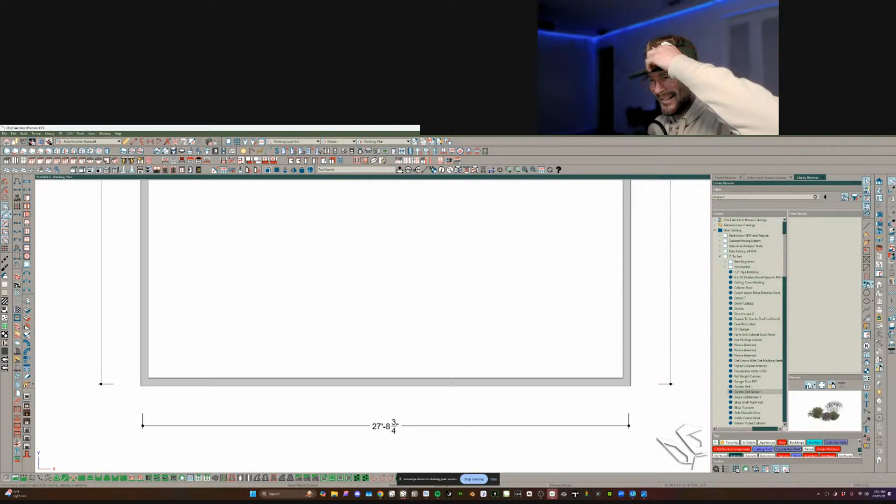Hey, you've been coming into these shows. I love having you in here. We've had some good discussions in the past. Is it an AI rabbit? Yes, I trained myself, or I trained an AI on myself. It's such a funny tool. Yeah.

AI rabbit, that's the cover art you're talking about, I think. That's this guy. Actually, what did I do? I doctored this thing up for the YouTube cover. That's just ridiculous, huh? Can I make that face? Let's see, it looks very concerned. It got my nose if I get the lighting right. Pretty funny. Yeah, I agree, it's pretty good.

Look what I was just working on too. I was setting up for a new video coming up where if you just have existing pictures, the only thing someone's doing is some kind of color change to mask out a room and apply it in a way that actually looks realistic. That's pretty cool. I feel like I could almost build an app out of this if I just gave 20 pictures to ChatGPT and said, hey, build me a little JavaScript app where someone could just change the color coding somehow. It'd be slick.

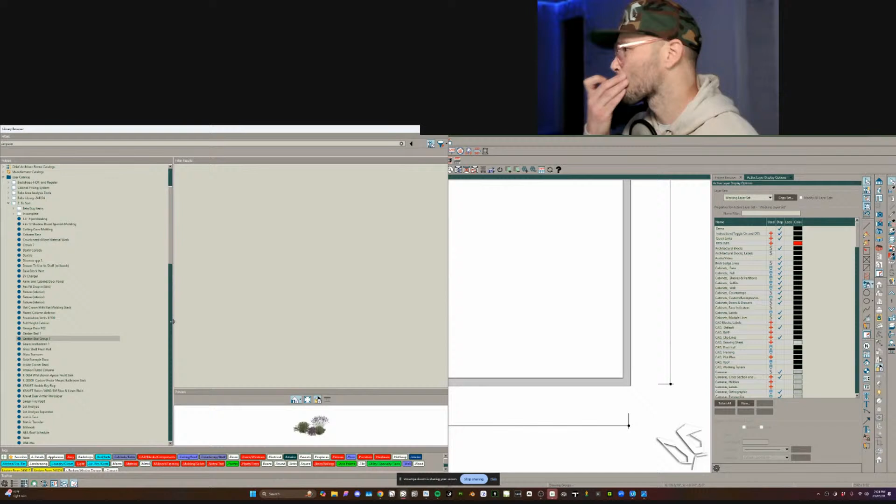And yeah, so, that being said, wish I could zoom in the screen a little bit more, get the text up. I probably could actually change the whole sizing. But this is a pretty good preview window. Here, I'll just make it bigger. Bam, big old preview window.

Yeah, Sherwin-Williams does that on their site. Right, but can you do it with your own picture? Can you, because I don't know that you can. That'd be cool if they figure that out.

Yeah, the text is too small. Let me see if I can do anything about it. I forget how to actually show my desktop, I haven't had to do that in a while. How do we show one's desktop? I know there was a button for it at some point. Show desktop? No.

Shrink this, let's just see if we can't change the scaling here. 150? Needs to still be tolerable for me though, I can't just be taking over the screen. Yeah, that's all right. Can definitely see that better. But I don't think I can shrink this. Oh, there we go.

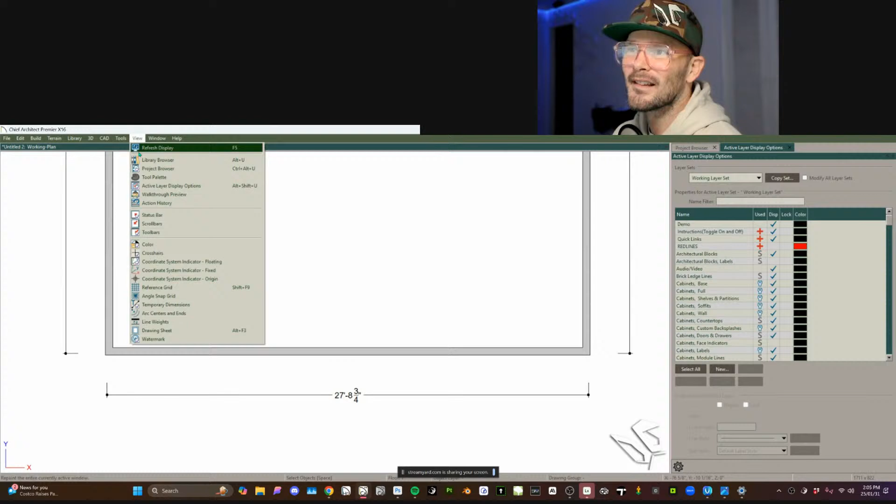Cool. There, in fact, what happens if I close this down and I'm going to switch to ultralight? I have an ultralight toolbar where it's just nothing. And now I don't know how to turn on my library browser without the button. Where's the library browser live? I thought it'd just be here. Oh, there it is, View. Cool, there we go.

Uh-oh, I stopped sharing my screen. All right, there we go. That's a bizarre looking library browser now.

Let's see, I believe the exterior, yes, not sure of interior. What's this in regards to? What's this responding to? Dang it, I missed something.

And Merlin, and you want a 98 inch for it? I have a 12-foot 4K projector. I've actually never- that's not true, I have hooked up my computer to it before. And right now it's on sale for like $1,200, which is crazy because it was $2,600.

Oh, gotcha, that's what you responded to. The Sherwin-Williams app will do exterior, not sure about interior. Interesting, I imagine exterior would be a lot easier to do. I don't know how we would pick up white because if you would look at the source image here, the source image is this. I have no idea how it would figure that out. It wouldn't, is the answer. There's no way it would.

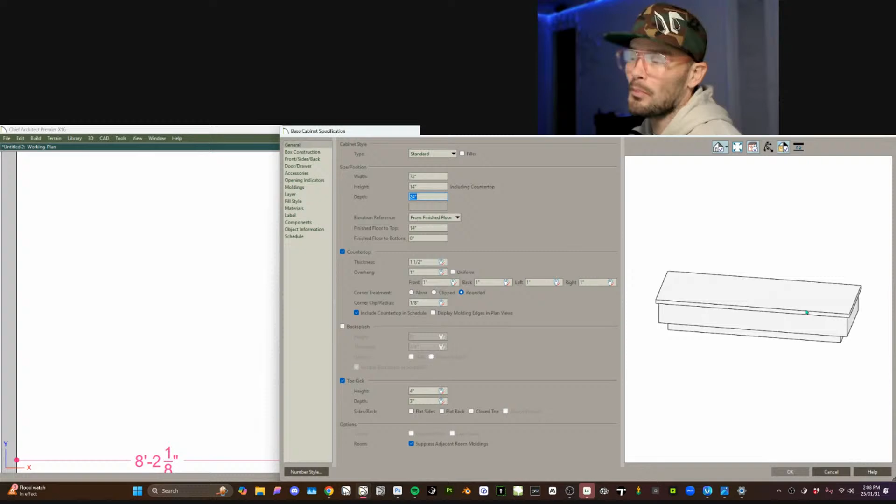Okay, so we got a base cabinet, and let's just say that it's going to be a 6-foot wide. This is going to be an outdoor fireplace, right? So we'll delete this item, delete that item, delete that item, get to a blank, and let's go. Let's go inset toe on all sides, right? And then the height maybe is like 18 inches, and it's probably less than that. It's like 14. And then so that could be like a stone top, or it could be a one-piece deal. Let's make it a one-piece deal where there's no overhang.

Yeah, maybe make it a little bit thicker. There we go. Yeah, I think that's what I'm looking for here. And so this fire pit sink just drops in like that, and you take it and center it up, right? Oh, except for it's got no emitter in the fire class. Dang it. So we got to fix that real quick. This is part of it too. I got to fix things as it goes, make sure that it's absolutely the way I want it to.

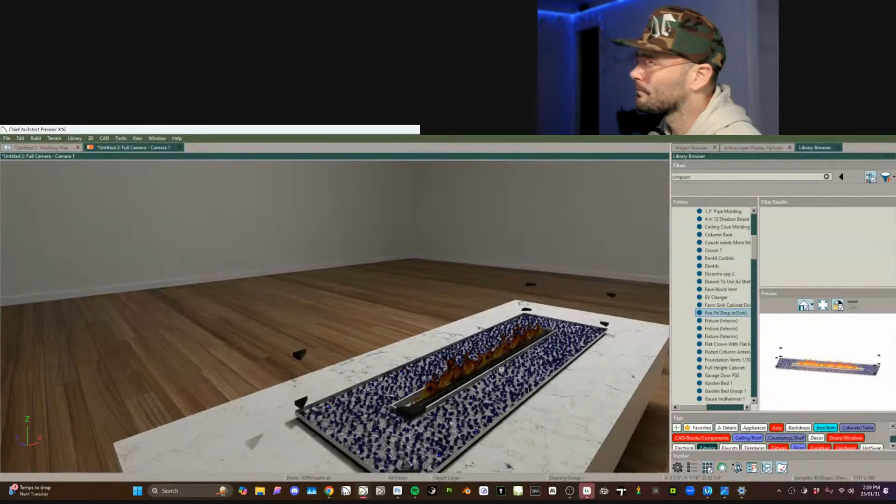So this fire should be, let's edit this. And yeah, it's not emissive. What the heck? Should be like that. Bam, give me fire. Give me fuel, give me fire. Okay, now let's try it. Surprised they don't do the hover over replace icon in this. Cool, look at that. And just like that. Yeah, I like it. Doesn't look like much outside right now. Maybe if we turned off the sun.

It's funny when you work with no toolbars trying to figure out where things are in the menus. There we go, because now I want rendering technique options. Let's see if I could go Alt 3 and Q. Interesting. Okay, and then, oops, we're hovering over the top of physically based. Wait, Q. Interesting. Physically based is not underlined. Oh, but I wanted technique options. Alt 3 Q. Technique options. Oh, try to remember that next time. And then pump this up to like 150. That's too high.

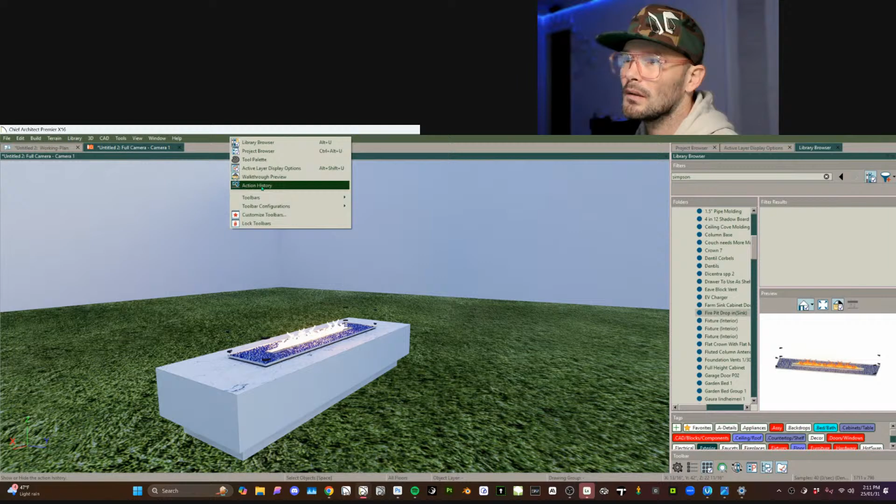All right, getting stuck in the weeds. Typical me. But yeah, this is cool because then you get to spray this, whatever you want. Could be multiple colors, yada yada. So I need to save that cabinet too. All right, I need my toolbar configuration. I'm lost without it. I really am. Look, full stone. Very cool. Why not just save the whole thing? I like that one. Fire pit. Rab's pits.

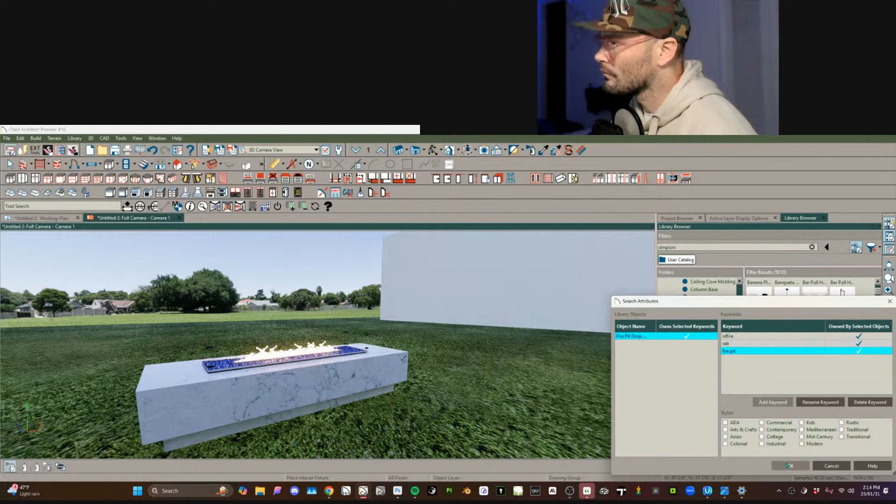Okay, what's next? Let's get to some good ones. I just want to skip some of the ones and get to the good ones. I know I've made something good in here. There's that fire pit drop in. I almost just kind of get rid of it now, right? We don't need the sink insert. I guess it makes sense. Sink insert. Yeah. I think I have components. Yeah, fireplace components exterior. Perfect. Fireplace components. Bam. Cool. Bunch of fixtures being used for what purpose? We don't know. Probably examples from trainings.

By the way, if you guys are in here, let me know if you have any questions. I can do a little offshoot, show some cool stuff. Ooh, I did make a foundation vent schedule. I don't know if I want to give that away. Does it do fire? Yeah, Twinmotion does fire. Twinmotion does animated fire.

Please convert the pagoda into a symbol included in freebies. Yeah, thanks. That is a pretty heavy scene, I'm not gonna lie. But what a fun scene. Yeah, it's a cool one. I'm not even gonna open it up. It's gonna take a while just to open. Rebuilding the roofs at the corners just takes forever for Chief. It does not like it at all. So if you're curious what the heck I'm talking about, look, there's a bunch of AI me's. Yeah, this guy. Yeah, she doesn't open up too fast. She gets real mad. My computer gets real mad. Bermuda pagoda.

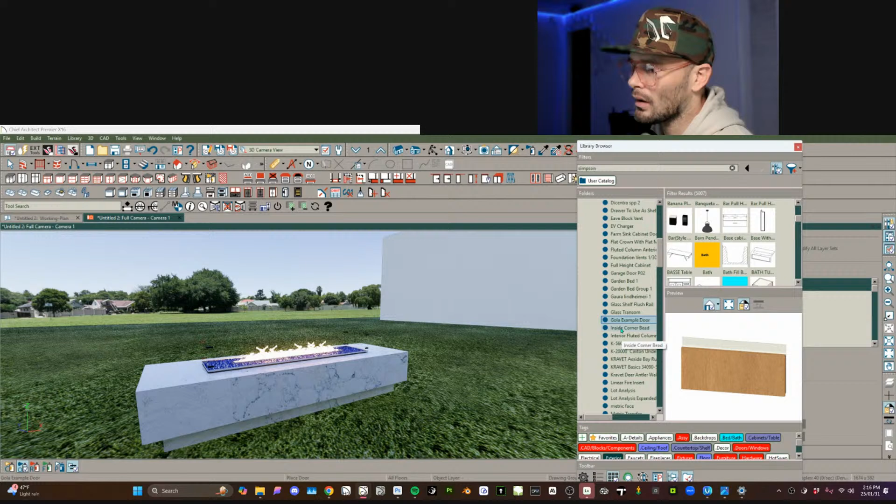Oh, the Gola door. I did build this out, but I didn't know what to call it. So it's Gola. So what did I call it? I called it, shoot, it's in specialty cabinets. Specialty. No, I have a specialty cabinets. Hold on. What do we have? Special. Huh. I thought I put it in there. Now I don't know what to call it. Well, where the heck did I put it? Oh, I know I could find it.

It's in my updates. So update from this date. Can we find, and then search by cabinet as a type. There it is, channel. So what's it actually called? Let's see. Shown folder, channel base, in components. Why did I put it in components? Let's go special instead. If I could spell, it'd be great. Special kitchen, special propane tool, special, yeah, special. It's special.

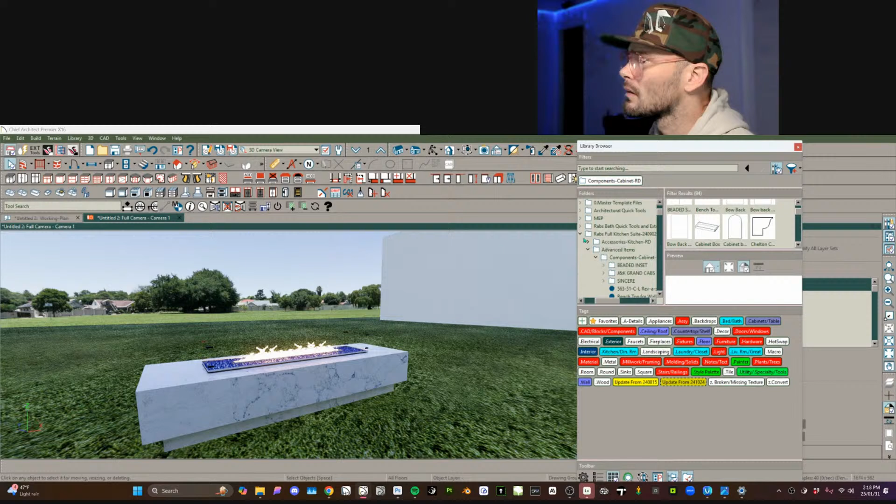Boy, it's hard to see with this font being this big now. Easier for you to see. It's terrible for me to see. This is awful. Let's see.

Gola. Gola is what it's called. All right, so you should be able to find that again. And add a search attribute, Gola. The Gola cabinet. Do you know what this is? It's difficult that you can't place a cabinet when you have no rooms. It's this guy. It's that whole channel slot system thing.

Gola. Where you would butt a bunch of these together and then do a little filler on the end cap to stop this whole thing. Yeah, because I do have a tool for that. Where is it? It's like bam, bam, and like this, and then like that, and then say, let's go. Should fix this so this always does this, no countertop. There we go. And that would be like the end cap, whatever that is, right? And maybe you'd fatten that up. Who knows? Yeah, that's pretty slick.

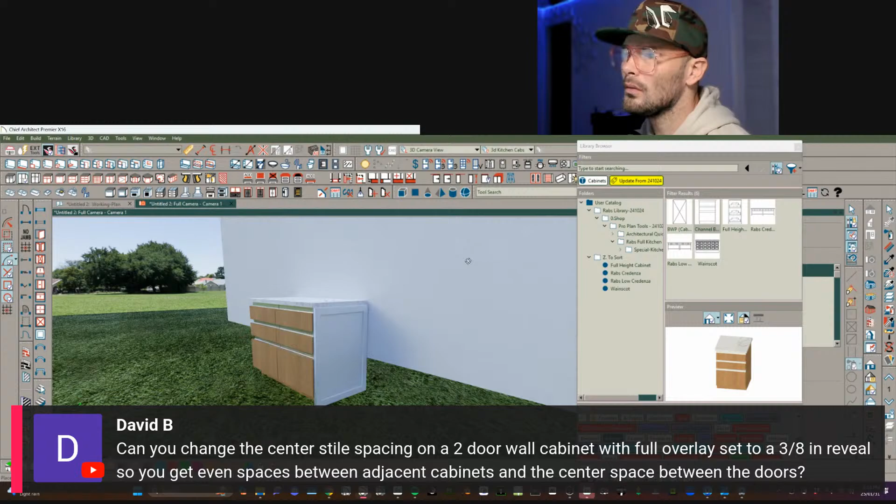Let me read that. I got to read this twice, David. Can you change the center stile spacing on a 2-door wall cabinet with full overlay set to 3/8 in reveal so you get even spaces between adjacent cabinets and the center space between the doors? I think so, would be my response to that. So let's just do automatic doubles, but if you have a stile in between, you could always just split this configuration. You don't need to use double door. But in door drawer, there's a stile between double doors, right? And there's no way to specify that stile is what you're saying?

Let's go into box construction, 3/8 inch overlay. Yeah, that does it. There's your 3/8 inch overlay, but you're saying that when I butt this to another cabinet, this reveal is wrong. So you want 3/8 inch stile in between. So then left reveal, right reveal would just be half of that. So you literally could put divided by 2 here if you wanted to. And that would make it even, right?

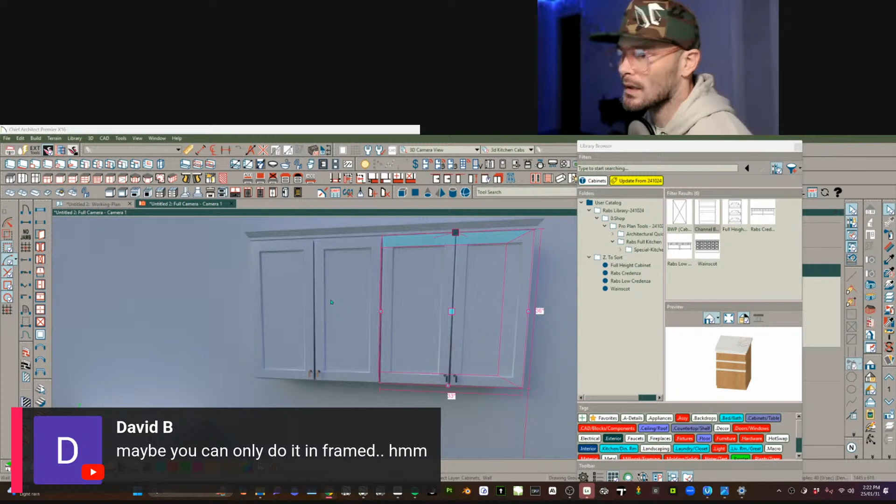Oh, and you're saying maybe you can only do it framed. You're talking about a frameless setup. Okay. We are in a frameless. So this is one way to do it: I manually adjusted left and right, and then 3/8 inch setting in between. But every time you split a door, it's going to be 3/8 no matter what, so you'd have to manually adjust that if you didn't want it to be 3/8. So this has got an 1/8 inch reveal on either side, and 3/8 in the middle. Not 1/8 inch, 3/16, half of 3/8. Don't make me do math, man.

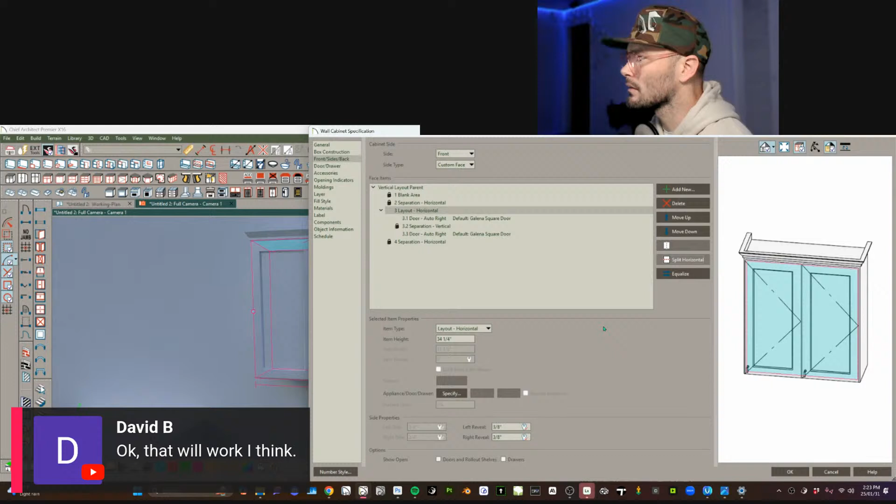Yeah, that'll work. The other way of doing this, let's set this back to default. You don't want it to be 3/8, you want it to be 3/16. No, let's just make it 3/8, whatever. But we're going to show this is even all the way around by taking this door right, splitting it vertically, and making this a door left. Maybe it's not reporting the same way, but this is doing what you'd want. Then we're just changing the separation in the item reveal in the center, where this is like 3/4. Now when we butt this, it should have the same look. Right, that's the same. Yeah, so that way works too.

Ooh, got something in my eyes.

Yeah, and then you would just set this to default, and it's not going to affect anything else. Because if you set this to default and then this was a single door, we're getting rid of the separation anyways. That should all still have the same gaps. Yeah.

When you're creating things like the fire pit, how do you decide what to start with, as you made the fire pit out of a sink and you made other things out of a cabinet door? Well, the fire pit, mainly because we needed to have an insert that's going on the top of a cabinet. So it's got to be an appliance or it's got to be a sink. And then the really nice part about the sink aspect of that is that we have the ability to decide how the symbol is going to cut the cabinet's countertop. So that's cool too.

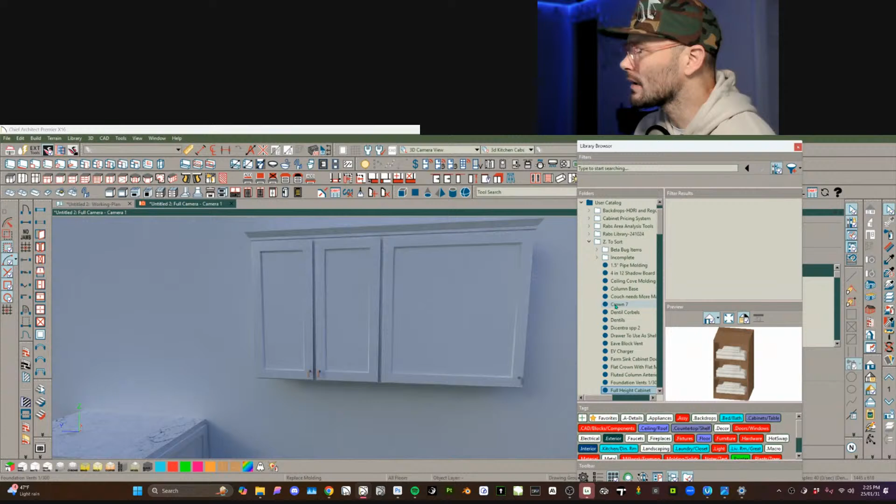All right, so what do I got here? Let's get back into my sort. Let's see what other goodies. I want the goodies. Foundation vent. I need to fix that cabinet. I'd like to do some more garage door building stuff. I want to make a garage door builder for clipped corners out of a cabinet. And that's challenging. That's challenging. Yeah.

Glass transom. What do you think I was doing with this? What is this? Oh, this is for showers. And it's set to be arched. But yeah, this is just to go into a shower builder. That's cool. That's a little add into my bathroom tools. It's just a window with no sash and no anything. That one's simple. There's that Gola example door.

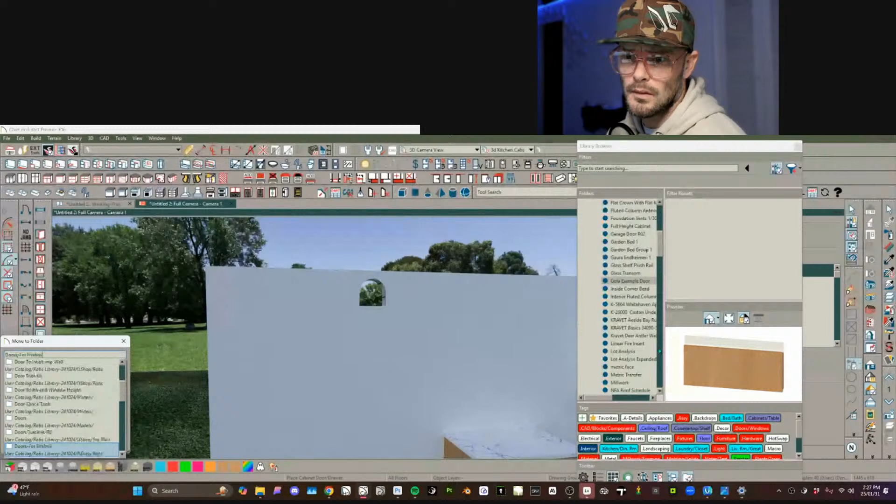So door's redundant. I don't know why I did that. Components, cabinets, tables, doors. Cool. You don't want it to show up with cabinets, but yeah, all right, fine. Door? How about door? Door. Doors, cabinets. Bam. See ya.

We had a good conversation, Dermot and I. Dermot's the one that's his code. Dermot's the lead developer at Chief, and that's his baby, the cabinet tool. And he's very proud of it. He is. And yeah, he put it in a really great way that the cabinet tool is a building block. You know, yes, it happens to do cabinets, but it's really a building block, and it's a great one.

Sonic, switch you over from Xfinity. Do you like it better? I have Xfinity, and I hate it. It's the worst. I pay so much for it, and it's constantly lagging. I just hate it. Hey, Dennis or Denise? I don't know how to pronounce that. Interesting with just the one N. Hope I'm not just being ignorant.

What do we got? Oh, we got a couple little cool materials that I've picked up or made. That's cool. There's a linear fireplace insert. How's that look? Fire, yeah. Have a theme. I guess I've been working on fire stuff. I should have a classification of inserts in the wall in here. That'd be a good one. So fireplace. Oh, this was already updated. Interesting. It's got 2 update tags. Wall and fireplace. It just never got sorted.

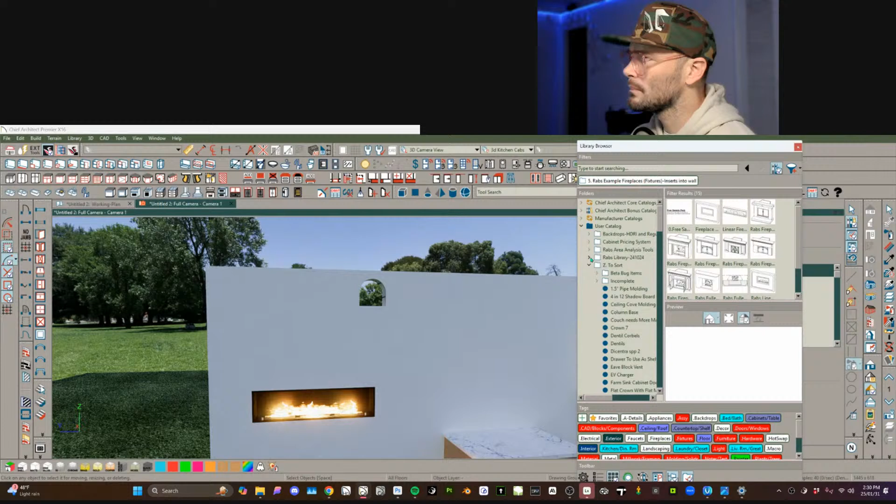Never understood fireplaces myself. I'm not lighting any part of my wall on fire. It's the 21st century. Okay. All right. Interesting take. I have a fireplace in my home. I love it. That's funny.

So this is my new favorite thing, garden bed group. You know why? So cool. Boy, I have been able to just build out landscape so fast now. It's just nuts. So let's just take a polyline distribution region and look at this. Isn't this just wild? Like, yeah, you got to edit just a little bit, bring it in a little bit, whatever.

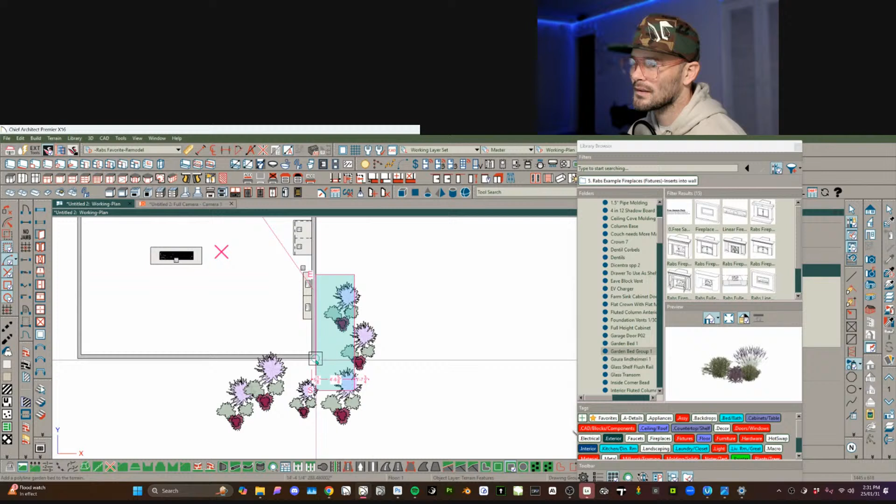But then you got a terrain polyline garden bed, right? Sure, we'll turn on terrain features and kick this in here and do a little fillets, right? Whatever you want. Maybe you want it more precise than that. And then, yeah, kind of kick this into place and have it produce its thing.

And so this is just an architectural block. And you could set the spacing of the block. Let's go 35. It's going to maybe jump that in a little bit more. Alternate grid, maybe? Alternate grid, kick it back to 45. But just super fast to build out landscaping that way. Just making architectural blocks with a bunch of landscaping. Bam! Isn't that cool?

I turn up the heat on this shot. Bam, bam, bam, bam, bam, bam.

Yeah, I've been pumping out landscapes. It's awesome. Man, does it make a lot of sense. In fact, I'm not using Twinmotion. Like I just did a project. Where is that project? Oh, it's in my

Nancy, you didn't actually see a contract from me. Wait a minute. No, this is Vicky.

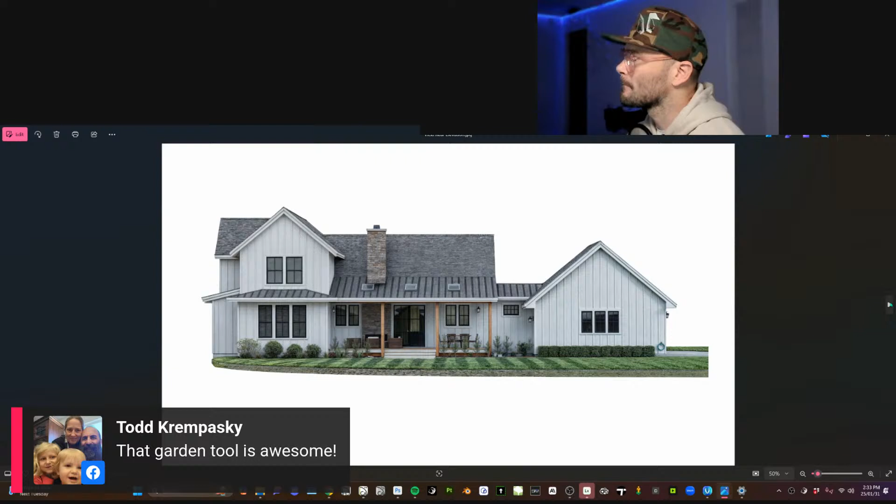Cool design they've got. I hope they don't mind me sharing. But yeah, I pumped this landscape out so fast. Look at that. Isn't that cool as an elevation? I want to do a plan set where the elevations look like this. I don't see that there's any reason why not. I don't think I would get tagged for this at all if I threw some annotations on the top of it. Because yeah, what a good look.

But yeah, the new landscaping tools built all this out just super fast. Even this little tufted grass with rocks, that's all just an architectural block that's got multiple different things in it, and then that's put into the distribution region and pushed around. So yeah, I was able to build this out quick, which means I got to drop the price down for the client.

Or gouge them. All right, what do we got?

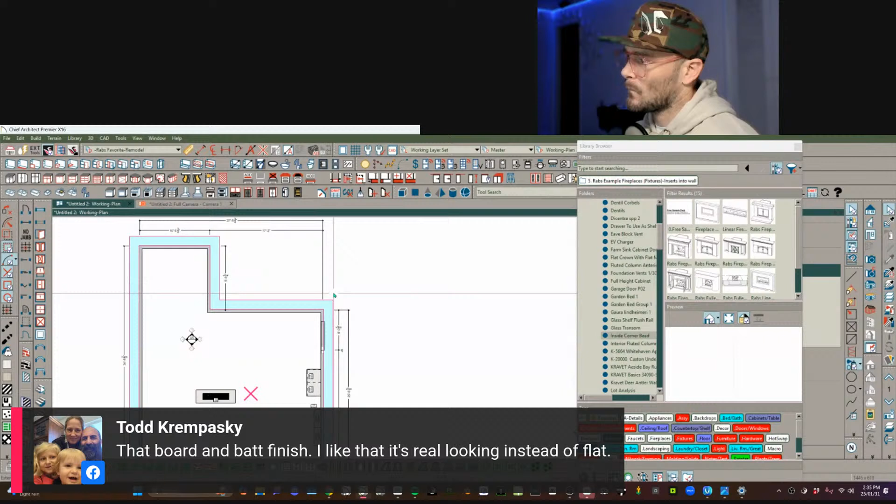If you haven't seen that, she's using a method I showed many, many videos ago where you make the shape of your building, where this is. Right. And then you take, let's see, a good way of explaining this. I think I actually have it.

Let's look up batten. I don't know why I don't follow my own rules. RD batten should have gotten me there. Oh, it didn't. Haha. I need to fix that. Batten. There it is. Backsplash. Board and batten. Backsplash. User catalog. Search attributes. RD batten. Look at this. We're updating stuff on the fly.

So that's an architectural block, right? So we get to select the exterior wall in your edit toolbar, wherever that may be. Mine's missing because we scaled everything up so high that it's not there anymore. Dang it. How about now? Okay. Make room polyline. Convert it. Oh, I've got your comment in the way too.

Make room polyline. Convert the polyline. Turn it into a distribution. Polyline distribution path. Okay. You can leave it light fixtures. That's fine. And then take your backsplash, hover over, replace. There we go. And then we're going to make maximum distance 12 inches. All right. So now I got a batten at 12-inch, relative angle, one-sided.

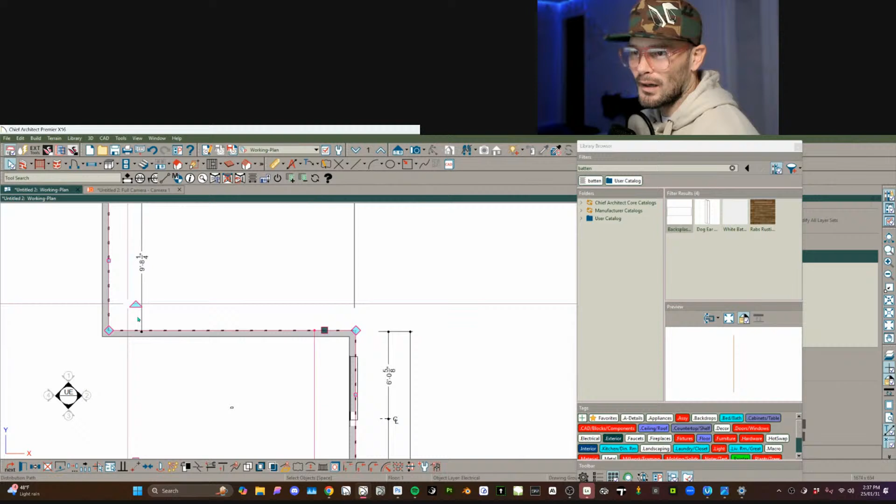Bam. There we go. Now you explode the distribution path, and you could select one of these, which is still an architectural block, and then you could explode that. Actually, before you explode it, you could marquee select all similar, explode. And now when we switch back to our camera view, these should be battens. Look at that. Isn't that cool?

And you might have had to select those all back in that plan view and lift them up, and then maybe fix a little top batten here, blah, blah, blah. So yeah, that makes life very easy. I don't know why they're wood. They didn't used to be. They used to be my batten color instead.

Are you doing it with solids? I imagine. Are you doing it with solids? Or are you doing it with backsplash? Curious. You're doing it with moldings. Yeah, but moldings don't shape around architectural features like the window and stuff.

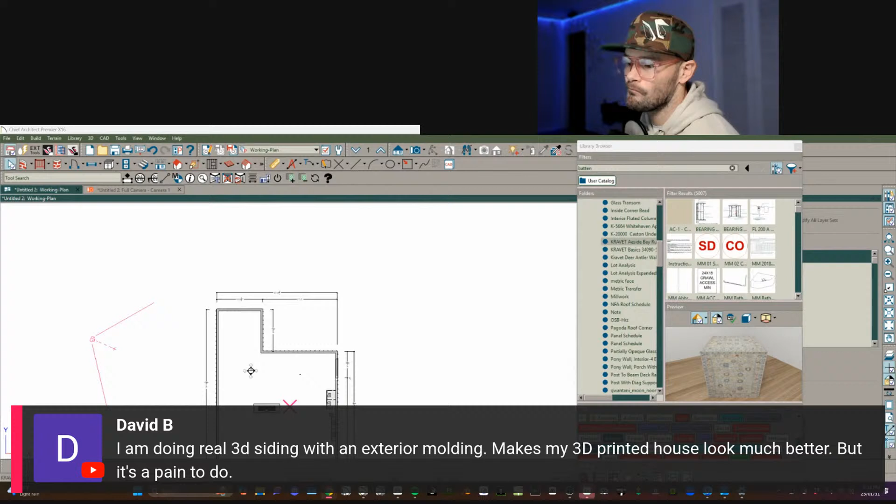Because I feel like you could do this. Like, all right, well, let's see. Let's take one of these guys, get rid of them all, and then, I am lost at this screen size. Yeah, so let's just say we got a window in here, and from the window to the wall, and we got a little backsplash, right? And we're going to say that he's what, 8 inches? And take him to the corner, and he will miter at the corner, and take him through.

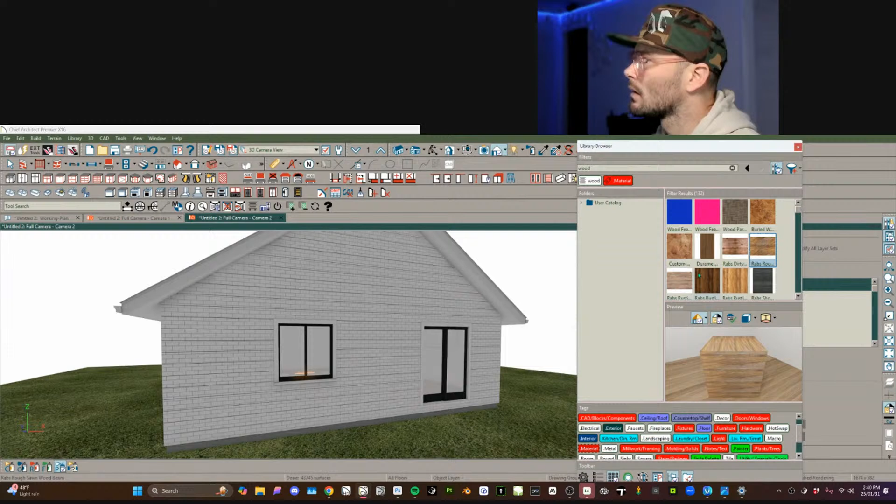And then bam, interval 8, what? 0.3. Sure. And then some wood texture. Wood material. Because it's not showing up. Wood. What wood? Or white, I guess. Plan mode, yeah, sure. Look at that. And then if you got really fancy, you could probably go in here and do a little material adjustment and throw in a little ambient occlusion map that's a little grungy-ish, dirty maybe, something like that would probably be perfect. Yeah, it's perfect.

And then you're switching to physically based. What does that look like? Cool. I don't know. You have to tell me if you ran into any problems with that. But I think we just get to come into this view, and if we have backsplashes turned on, we should be able to just do this, do this, do this. Yeah, do that and do this. Yeah, because that was the longest side.

So now do we have two sides? Yeah, there's the two sides. Cool. And look at that. They join in the middle. And they're still cutting for everything. Except for they cut around what happened up here. Oh, this is my transom window. Nice. Yeah, it looks pretty nice. What's our surface count on this model already? Yeah, it's not bad.

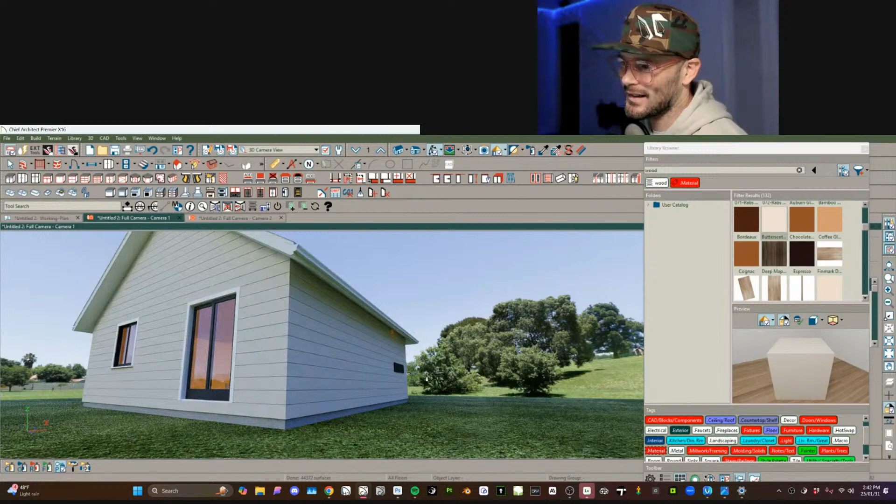Look at the corners. What's wrong with the corners? You were looking at, oh, on the other side was the texture. That's because this is a texture. But this is the actual, that's the backsplash. Zoom in on a corner. Okay. Yes. What am I looking for? You want this like overlapped? Oh, nice. Yeah, try it out.

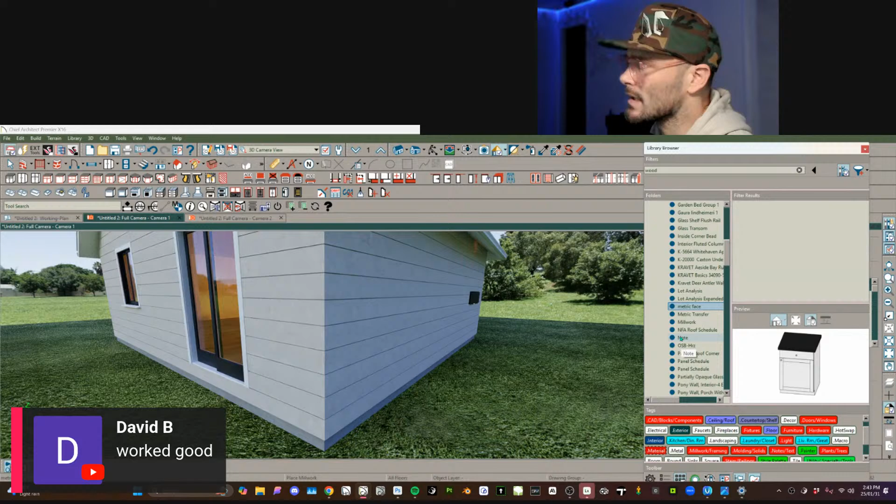What else? I know there's got to be some gold in here. Some of these materials are pretty cool. Metric face. Oh, I started building a metric template. What a pain. Metric transfer tool. Yeah. Millwork symbol. I wonder what I was using this for. Sometimes I make stuff, I don't even know what I was doing with it. Why would I need a 3-rail setup? It's for a railing, probably. Net free area roof schedule. Cool. Huh. I don't know what that's for.

This is just garbage. I noticed some glitch lately when I'm doing some templating stuff. It's automatically adding certain materials to my thing. Ah, the pagoda roof corner. This thing was such a pain. Panel schedule. Oh, electrical panel schedule. Ooh, does this work? I never know the state of things with my panel stuff that I try to make automated. Okay, let's try it out.

Let's build some walls. All right, and let's say this is a kitchen. Let's say this is a living room. And what does the panel schedule do? Nothing. Doesn't do anything. Womp womp. How about this? Oh, look at that. All right. It's automatically picking up first and second pole. That's cool. And what? No door yet. Okay, place them anyways. Living, it's automatically making living outlets. All right, what about switches though? So it doesn't do anything with switches. So what about lights? Well, let's see if it would take distributed lights.

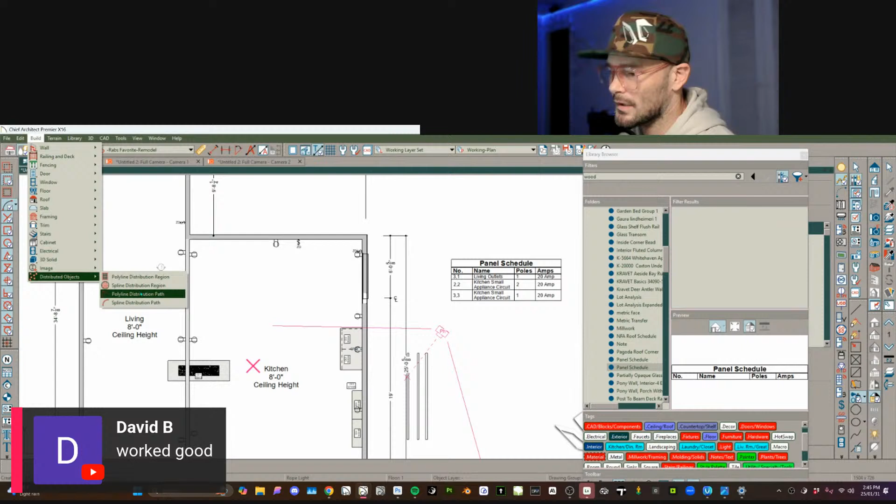My pro plan, by the way, in case you guys don't have it and want to build this for yourself, is that the default polyline distribution path is lighting for me. And when you get really used to it, like say I want a light centered on this cabinet, you're just going to draw the thickness of the cabinet. Now it's centered on the cabinet. That part's easy, right? But then you can also use it to say, hey, I want this whole run to have lighting and I don't care about the centering, etc.

And look at this. This is turning into living room lights, kitchen lights. So the only thing here, oh, I must have this built into my template. Look, it's showing that it's in 2 schedules. Or, oh no, I know what it's doing. So I have to assign a number, I think. Or maybe I can get it to see schedule numbers and only report the second schedule number. Okay, let's try that. Let's try my bot.

rabbitdesign.net. Oh, by the way, look at this, my main screen isn't loading. I don't know why, but I have a new push notification thing on my website. Why isn't this showing my graphics? There we go.

Resources... and building code lookup is not what I was looking for. Macro scripting, here we go. And let's go, all right.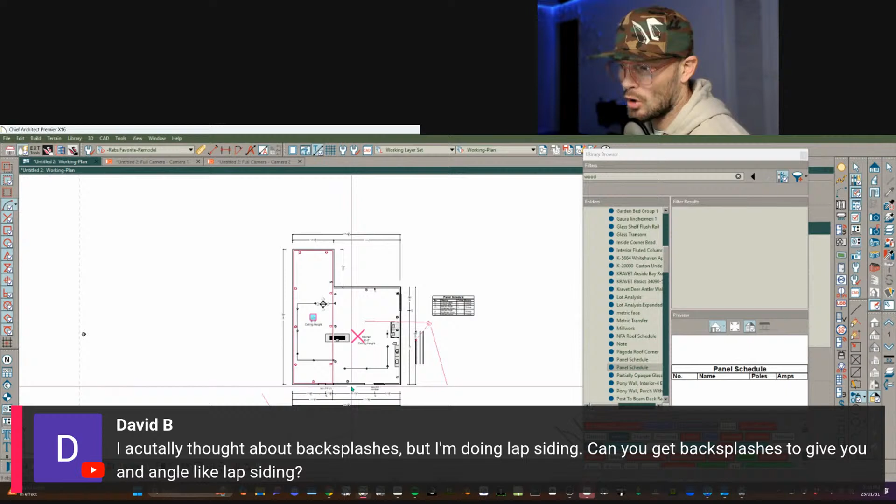Find and plan, open these bad boys up. Let's make a custom field, or there are custom fields in here already. So macro input one already has something. Oh look, I already had some value that's being reported. But really, what I want this to be is this.

And I don't think I need the quotes. I think I just get to do this. Will that fix it? Let's see, or does that create an error? That creates... there's no schedule number. There should have been though. Why?

Why? Let's get into text macro management. Let's just do a new little test. Undefined local variable or method schedule number for nil class. Why?

Why? Okay, try this. Oh, because it's not going to see the second part of this. Schedule number for nil class. Don't I have objects? Objects are selected. Interesting, this is in a schedule. Oh, worked there, okay. Yeah, that works. What's the problem, guys?

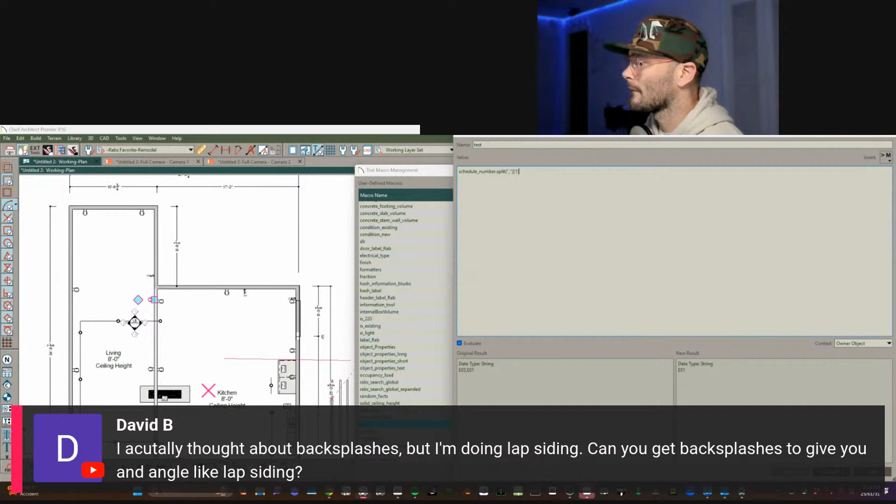What's the problem? Let's put test in there instead. I might have needed to do this. Let's try that. Can you still put... can I do this? I think I can do this. That's nil class. How about this? That's nil class. All right, we'll try a couple of them.

Does that do anything? Nope. Getting sidetracked is what I do best. Still nothing, I'll have to mess around with that. I want to know how that works. I bet I could get that to work. Well, because we could just do that test again.

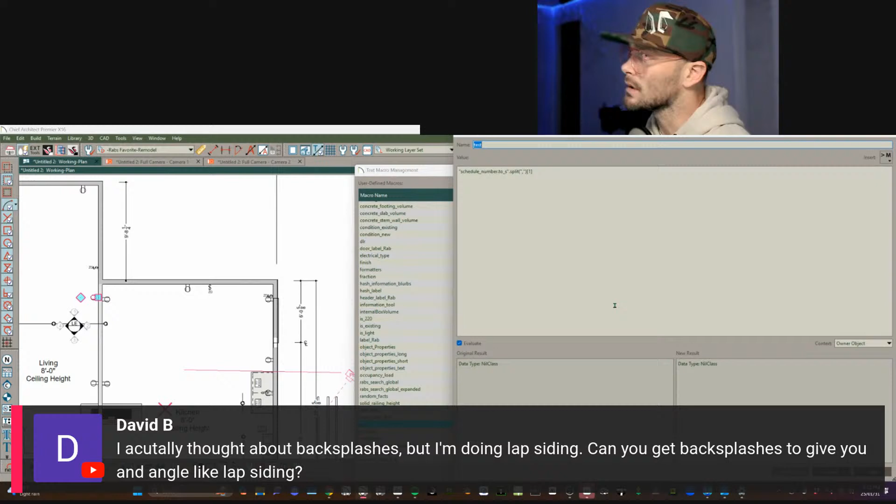Could just input this instead. Dink, dink, yep, okay, and then... and then. Still didn't work, dang it. Give me all these and let me make this work. What is this? Really, that doesn't work? I'm skipping a step, I know it. I'm messing something up. All right, moving on.

Back to this. I didn't know normal maps could affect geometry in Chief. Well, we'll show you how it works. We got to open up a little Photoshop.

And let's just do a little new texture, and we're going to make it an elongated texture. And it should be pretty small, so maybe we'll go 768 divided by 3. There we go, something like that.

And then what we're going to do is take something I know, which is this image right here. We're going to take this normal sphere, bam, like that. And then we're going to play with this just a little bit, which is that.

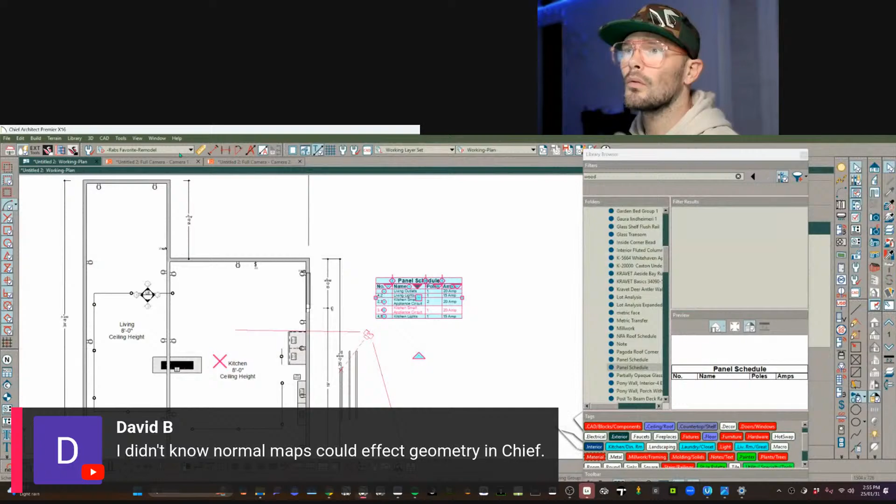PNG, sure, and we'll just throw this in, what, siding stuff? Siding bump normals, yeah. And what are we calling this? Like a V rustic? And let's go see if we can make some magic happen. So we're going to stretch this.

Stretch this like so. Ha! Look at that. Isn't that cool?

Except for that—I know what you're asking for, because you're 3D printing, so that makes no sense for you. I forgot about that detail. That's an important detail, huh? You're trying to print this, and I'm sitting here making this thing look rustic for you. Yeah, I'm an idiot.

I like this though, I'll have to use that again. That's cool, looks pretty good.

If we change the color of this, I bet this really looks like a nice texture, especially if we just threw that same texture that was in the ambient occlusion map into the roughness map. We're probably going to get a good looking texture out of this.

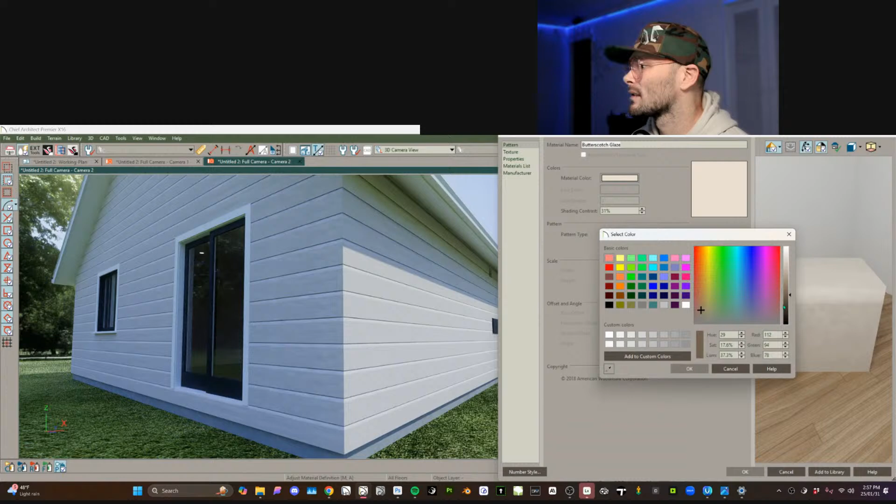Yeah, that's a pretty good looking texture, especially if we threw in a little bit of bump and some kind of wood bump. Let's see what that looks like. Yeah, let's crank up the samples.

Funny little thing, we're still seeing the texture underneath. Oops. There we go. I like it. Fun little stuff, we'll have to add that to the catalog.

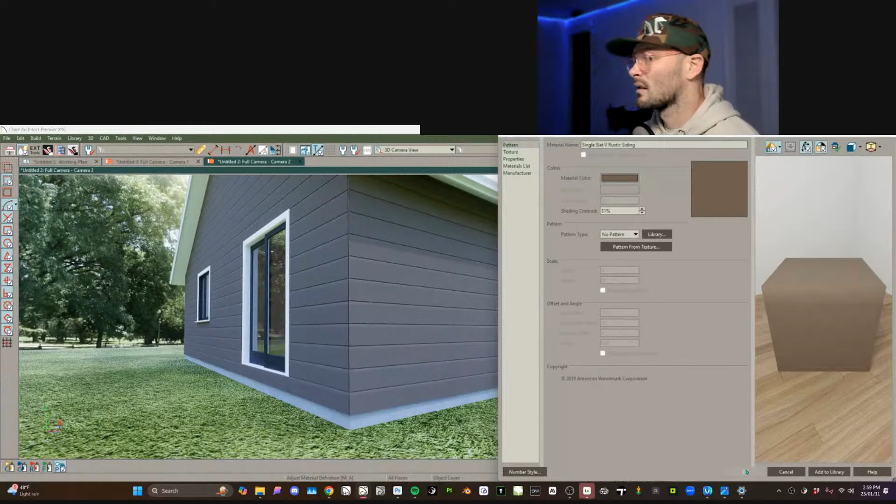Oops, I forgot to add it to the library. Okay, this is how things get in my library—getting these sessions.

Nice, catch me singing. Yeah, yeah, I caught on a little slow, David. Looks nice, doesn't affect the geometry. True story, yeah.

Yeah, that would be cool if we could do some backsplash profile stuff. Although if you're printing it, you probably could do just a little recess as opposed to an angle, right? Yeah, I just got to the same conclusion as your next comment. Are you—is this a resin printer, or are you saying FDM?

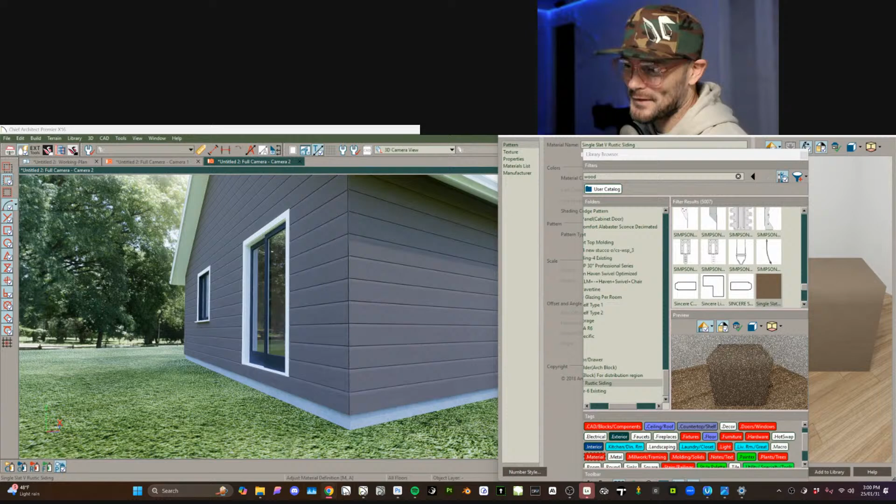I have a printer sitting behind me that's huge and I haven't used it in a while. Last time I used it, it was getting a lot of failed prints. Uh-oh, oh no, the time tracker notification is off the screen and I can't hit it. And so we can't achieve it. Okay, there it is, that'd be funny.

All right, what else we got in here? Let's see some cool stuff, I want some cool stuff.

Little tile, lights, stone paver, angled callout—ooh, I like this, this was cool. Let's see what I could do here. Show us this.

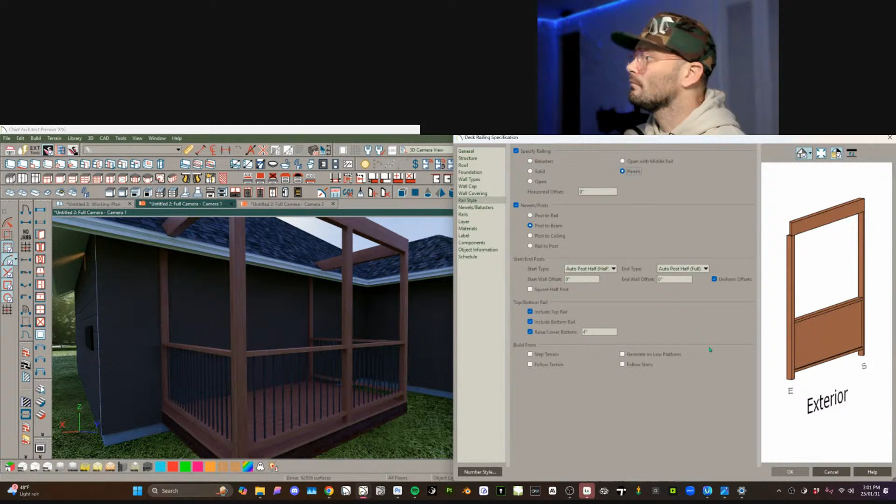Building a funky little house here. This lattice is—let's see if we take these and do panels instead. Cooperate with me, why are you being a jerk? There we go, panels instead.

Where's this lattice? I hate when you click off of the library item and then click back into the library and it doesn't have my selection highlighted anymore. So now I have to go find it, even though it's in the preview window and it's not selected. Isn't that terrible? What are you guys doing with that?

There it is—oops, did I pass it? Where the heck did it go? That was weird, it showed a preview a second ago.

I'm losing my mind, where did that go?

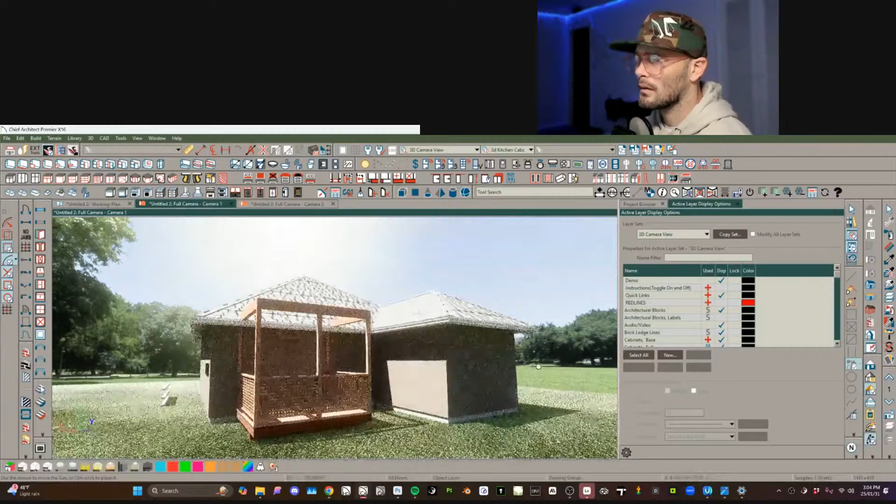$100,000 sunny day. Yeah, that one ended up being pretty good. Yeah, that looks like 3D. And it's just a material. Cool, that was a good one.

All right, no one's said they need something yet. They don't need any of these yet, none of these are piquing anyone's interest. Let's see what else we got.

Had a new backsplash—what's this, Ackerman wood? Oh, that's a nice looking floor. Well, that's a good looking one, I like it.

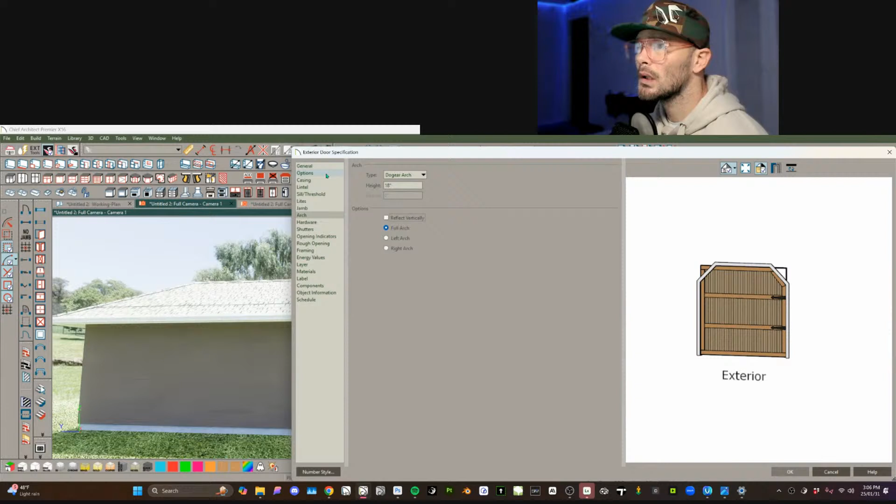I made a dog ear garage door, which I was really happy with. But you have to set it up so that it's dog ear, like that. And this is for double wide, but it could be single. And you have to set this up so it's—what, 18, 24, nope, 18, nope—options 2, nope, vertical panels. Can't you?

Oh, I guess it doesn't need to be a garage door, it could just be a hinge door, right? And then you could set it up for double door only. Yeah, look at that. There we go. 18 feet wide, yeah, looking slick.

Boy, that's nice looking. Oh, I just built this to show how you can make this in with cabinets, that's all one piece cabinet. This is a nice freebie just because it shows you the power of the cabinet tool, right? Yeah, because you can see—go look at the stacks. Forgot that it highlights things as you go. Yeah, look at the stacks and see how this is all built.

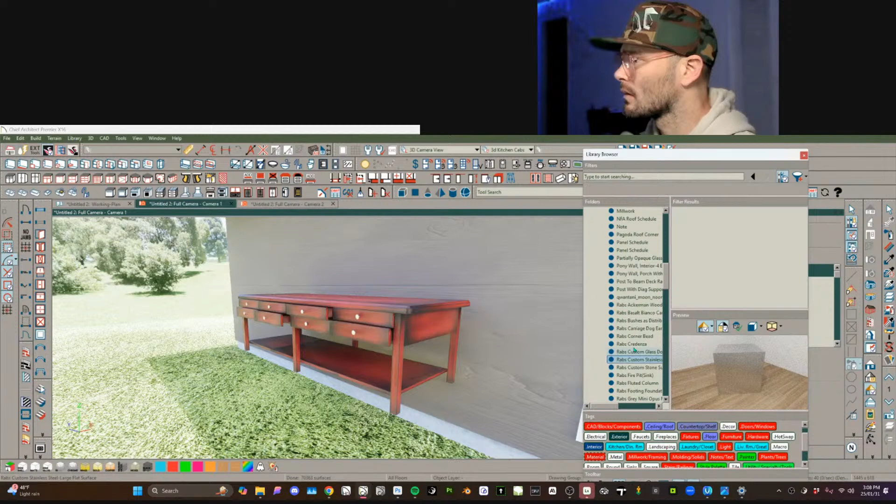Custom stainless. This is going to be dated already because, oh no, I used anisotropy. Did I? No. Yeah, custom stainless. Wonder what the deal is with that.

Custom stone support with column. This looks like it's just a symbol. Yeah, it is, so it's just got a square in the middle. We could do better. Now I have a cabinet tool for that, it works better. Oops, sink.

This is a pretty little fireplace. I'm gonna catalog this one, give it away. Cool. Oh, this is already fireplaces.

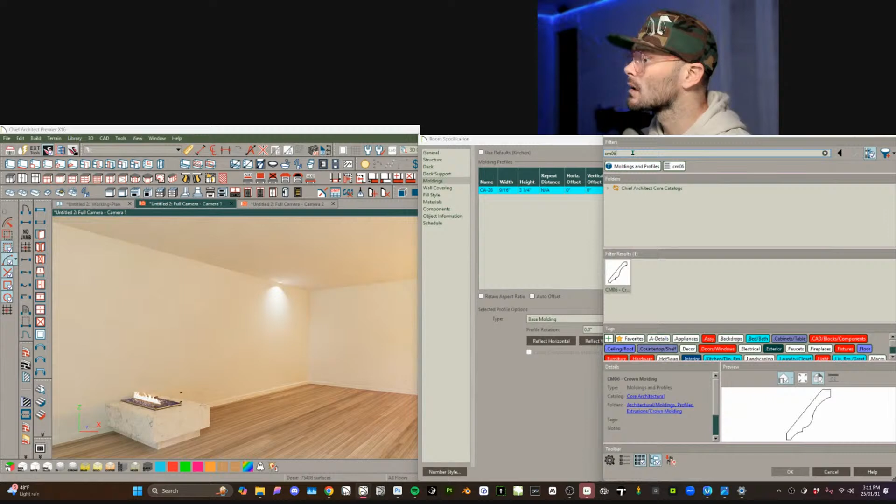And if we painted it the Victorian, what does that do? Oh, that butchers it. Oh, I know how this works. Oh, this is hard to build, you need a solid.

So that's the room we're in. Let's do a little back clipped cross section. Right, and then we just want this. So we're going to do Alt, CAD detail from view. And we're just going to take that guy right there, is all I want. And you need to be connected. Connected, and are you one object now?

Not quite, because you need to be... man, where's my tools? I need my tools. Where's my edit toolbar?

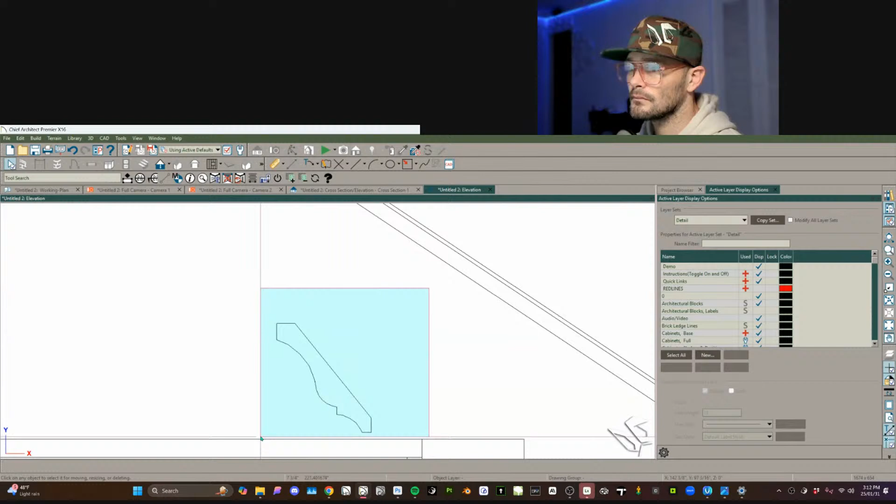Okay, extend objects. No, not gonna let me. There we go, bam, okay. Copy, paste, hold. Sure, we don't really need it here, but that's okay.

Convert it to a 3D solid that has a 12-inch section. Yeah. Let's get rid of the molding in this room for now, it's CM06, or let's just move it down for now.

And pick the right camera and library browser, bing. Excuse me, molding, you should have moved down. You're in my way.

That's weird. Oh, at the bottom, stick it at the bottom of the floor. There we go, there it is. And if we span that out a little bit and then paint ornate Victorian on there, look at that.

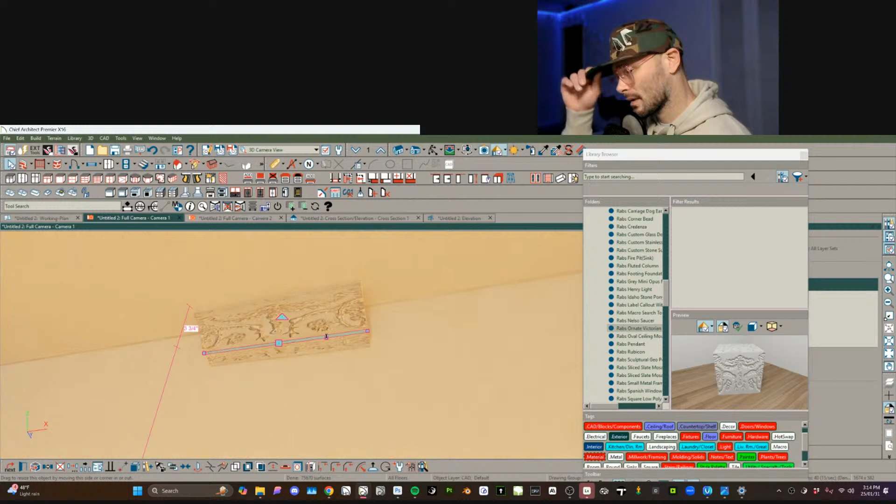Okay, so now we want to stretch this so that it's split in the middle of that detail, like this. There, something like this. Now, I could do a better job of this, but I'm not going to.

Now let's take this and convert it to a molding. Sure, add it to the library. And it needs to be rotated because it's a jerk. Hate when I add it to the library the wrong way. There, bam, look at that.

And now, 0-inch, it's a crown molding to top. Yeah, to top. And I should be able to hover over with my new molding.

Yeah? No? No. Yeah? Oh, what do we get? It's like upside down. It's an upside down molding, but that looks cool.

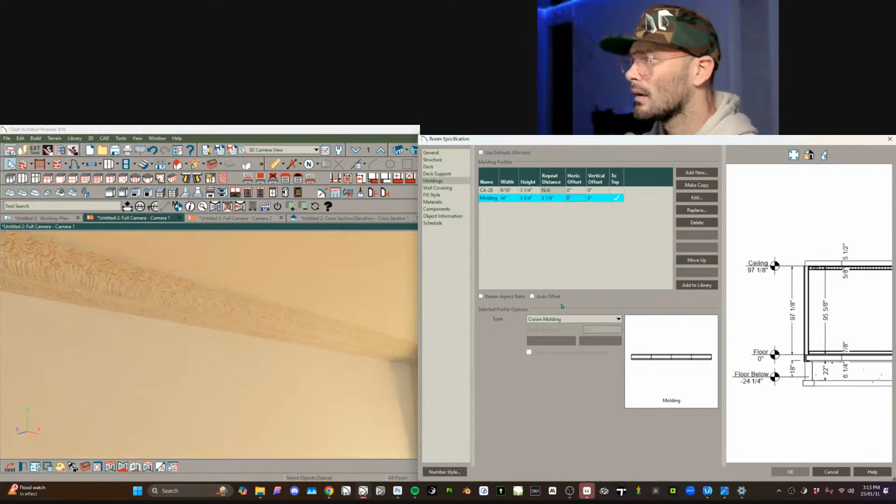Yeah, it's funny, auto offset. No, I don't want to offset it, I want to reflect it. Why doesn't it give us the option to reflect it when it's a 3D molding? That's why.

They don't give us the option on a 3D molding to reflect on our decisions. And I mean, here it looks like it's right side up. Why the heck is it being flipped upside down? Let's see, what's the gizmo tell us? Where is the gizmo? Why isn't the gizmo showing? I have it toggled on.

Boy, if you need someone to find Chief Architect problems, I'm your man. There you go, there it's upside down and backwards, and possibly the right way.

Let's try it now. It's gonna let me? No, no, it's been very much backwards. So what has to happen now? Now it needs to reflect like this. There we go. No, it's still upside down. Whatever.

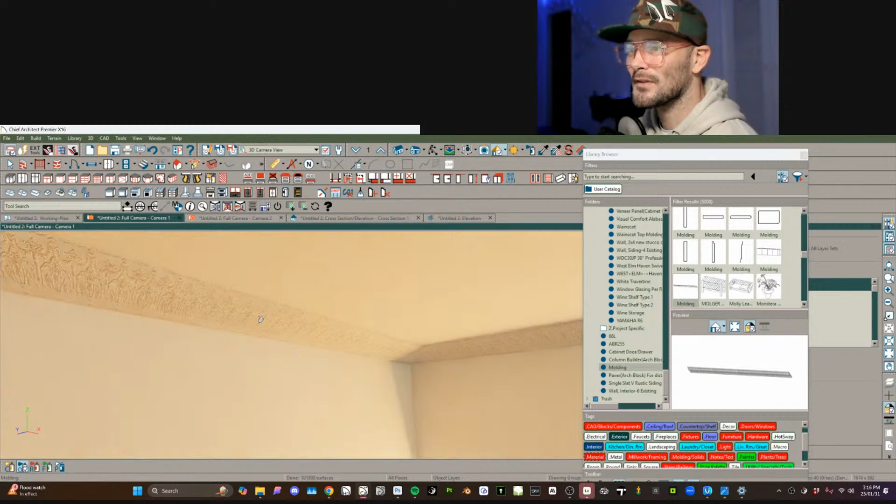Now I'm all kinds of screwed up. This way, yeah, this should have been right the first time. Who knows? Who knows? Whatever, 3 1/4 height.

14 height, how did it get that? That's just it screwing up. Oh, because, okay, I think I know what's happening there. The profile is getting stretched because it was seeing it as the repeat distance. There we go, look at that.

Little ornate looking crown. Throw a little dentil in there. Cool.

Let me put a light in here. Oh, that's not the light tool. Yeah, isn't that cool? Ba ba ba ba.

Yeah, David, I'm looking at your comments, man. You've just been struggling with the 3D stuff. I have never even wanted to try because I had someone else tell me how difficult it was.

How about in X17 downspout gutters? Anything you suggest right now will not make it into X17. It could be in X18, but automatic downspout gutters would be kind of cool. We could build them pretty fast though. But yeah, that would be cool.

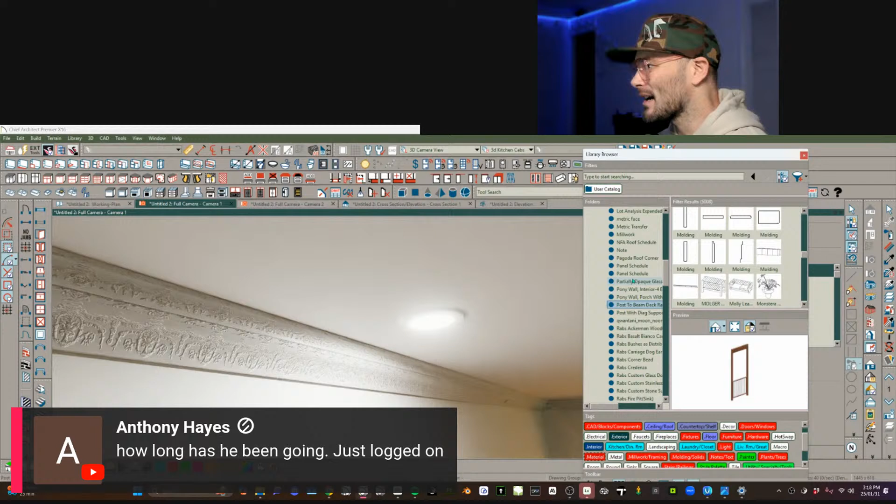There's so much. It takes so much to, man, some people don't understand how much work it is to have an organized library where you can actually find things. It's so much work. I have to go through every one of these and do tags and make sure that they're working correctly and contextually make sense, just even this, which is just a flooring texture, but I want to make sure that you're going to find it with the right keywords.

Yeah. Okay, press OK. And then I have to make sure you're going to find it with the tags. And a lot of times I even go in there in details and I got to tag it with what update it's coming from. But this is wood floor material. And then I got to move it. Perhaps flooring pack number 4 we're on. Cool.

Yeah, same thing. Just all these tile textures. Takes so much time. Sometimes I build tile textures from existing stuff so that the tag is already there, but not always. So material tile. Woo! And sometimes I want this to be associated with kitchen and bath, right? Material tile, and it's a wall tile. Or this particular one could be a floor tile. Search attributes. Yeah, that already has its stuff. Tile RD. Bam.

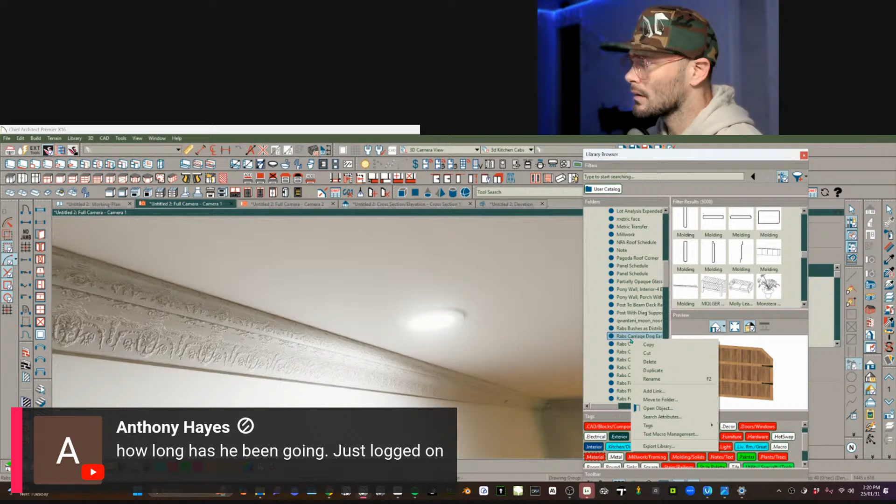Carriage door target here. So this is going to be, I need to put some additional notes in this one. Oh, see, I lost it again. Carriage door here. So we got to put a little rename. Apply as hinge door. Little note for the end user there. So this is door. I don't have a garage designation, but exterior door. Yeah. Oh, and we need to put search attributes garage.

What else? Door. Overview tools. There we go. Architectural. Cool. There's the man. My favorite. Merlin. Pony wall porch with extension.

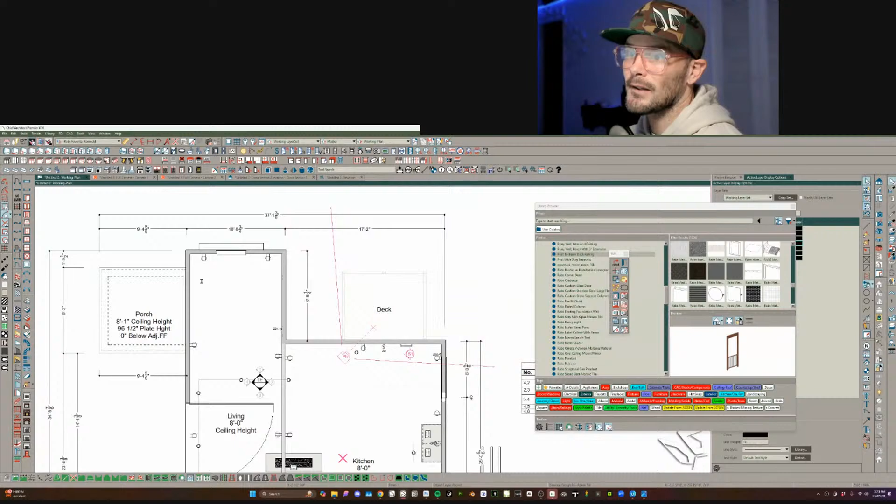Yeah, I have a suite of porch extension tools now. So that's just basically a porch generator with extension with no railing if you just needed slab, period, full stop, etc. with no roof overhead. And that will put a little overhang extension in there, right? Something like that does that automatically. But the other ones I've got now are pre-built with certain wall types, so that you can just dump this in like this. And dimension to individual elements, which is really nice.

The only pitfall of this system is what? I came up with it. Oh, if you have a flat roofed type and a gable end wall, then you have to do a little workaround to get rid of this overhang right here, which is just that you put in your own manual ceiling plane. But there you go. Porch extension. Let's rename this porch. Why not?

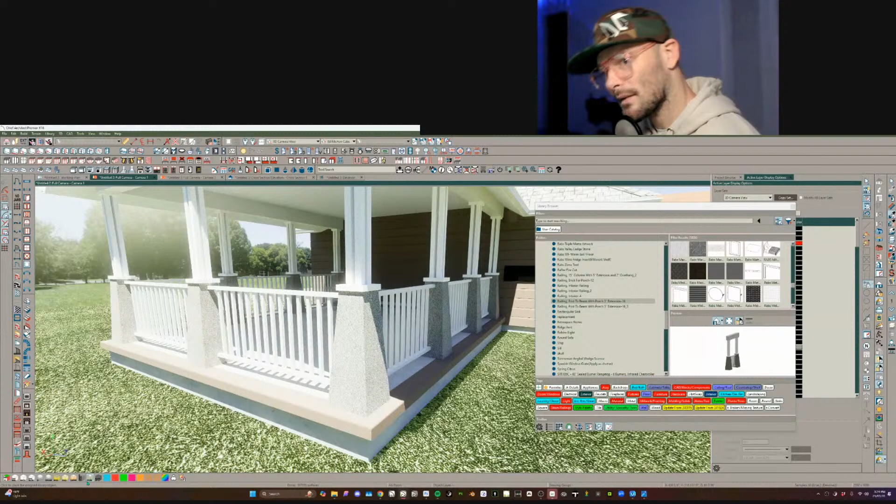Right. And so you can apply. You can also now in my Pro Plans X17 version paint any surface like this and not have it automatically add some huge surface area. So if I did like brick herringbone would be an easy one. I can just paint this on the fly and have the extension be painted too. And look at this, isn't that nice? That's so pretty. Yeah. Throw a little door in this outside wall. Force it to build around that door. Isn't that cool? That's so cool.

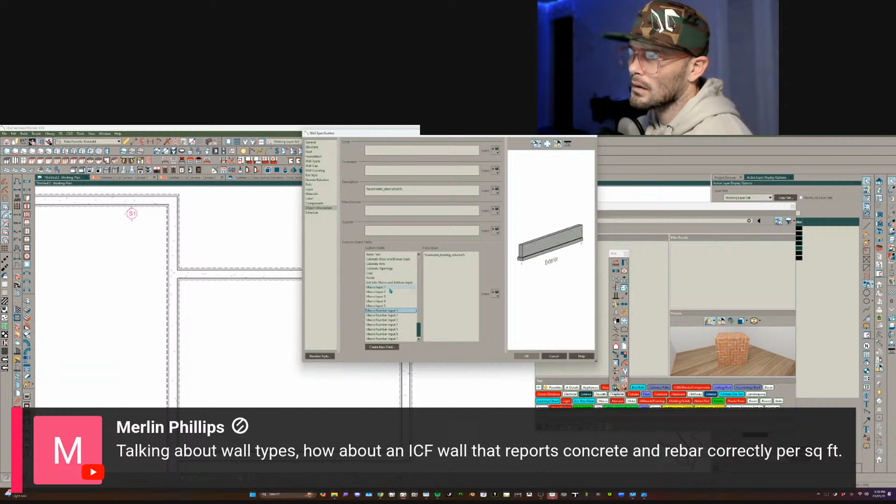So I'm already reporting, I already have a macro that reports concrete. I think it's even built into my default foundation wall. Yeah, concrete footing volume, concrete stem volume. So if we have that selected and we go look up what that's picking up, let's look at stem wall volume. What is it doing? So this is specifically looking for if something is included in concrete in the wall type's name.

But you could add comma, quote unquote, ICF, and then upper layers, material data quantity, lower layers, zero material. So you'd build this specific to your ICF wall, or I could do it a different way. I'm just indexing the first layer of the wall type is all I'm doing. I'm looking at volume of that, whatever that is.

But instead, I could say, hey, search material data description dot name for downcase includes ICF, or no, concrete in this case, and it could report concrete volume based on that. So yeah, you could build that, but give me the wall type. I need an example. Send it to me.

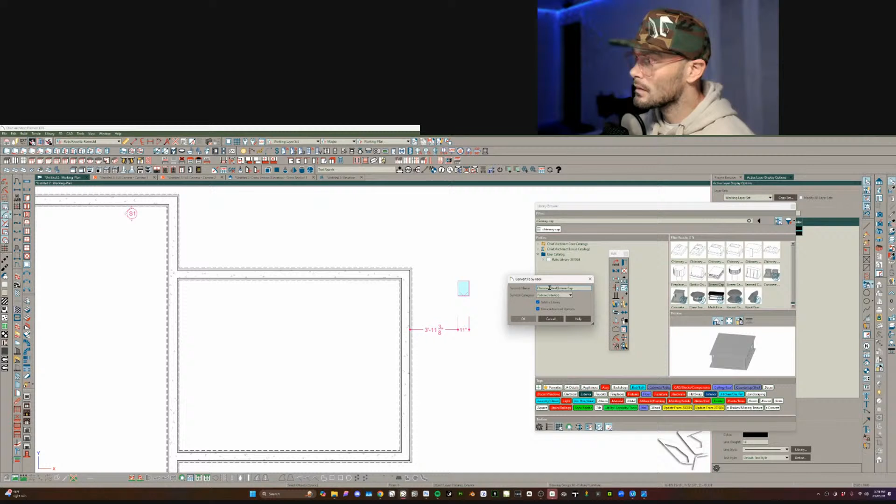I need to make a bunch more of these sinks that basically can insert into the, like if you took a chimney cap, and man, Chief's got some ugly chimney caps. Here we go, screen cap. And then we say, we're going to convert the selected to symbol, and it's going to be a fixture interior, add to library, chimney. What are we going to call this one? Screen cap, chimney screen cap, steel, screen cap, and quote unquote sink.

Yep. And then we need to, in options, specify that this is sink kitchen and inserts into countertop. And then I'm going to stretch this uniformly. I guess so. It's too bad. It's always going to look ugly when it gets stretched, but whatever. All right. So now that's chimney cap. And we should be able to take my fire stack. Well, this is going to be a fun house. Fireplace stack. Let's go look at this. And clearly we got it going the wrong way.

So we should be able to, I love this reflect about diagonal that we have now. Right? I love that part. I don't know why I did that. It made no sense that I did that, but whatever. Okay, there's a fireplace stack. Explodey. Bring this thing way up to the top. And then our new chimney steel screen should be able to just click and replace. Bam, like that. Look at that. And then tab into it. Right. Yeah. Chimney cap. Cool.

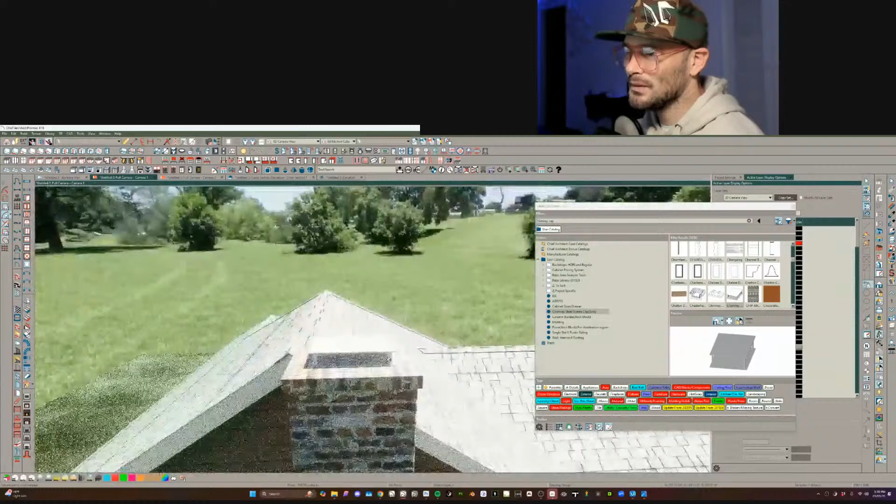Maybe we'll make it taller. Cool. Yeah, isn't that fun? Do a little offset here. I've seen this one before. It's just down the road from me. Looking ugly as sin.

What else would you call this? Vent? Hmm. Place fixture. Yeah. Okay. Fireplace chimney vents. Haha. Have a folder for it. Cool. Feel like I'm making more symbols than I am sorting.

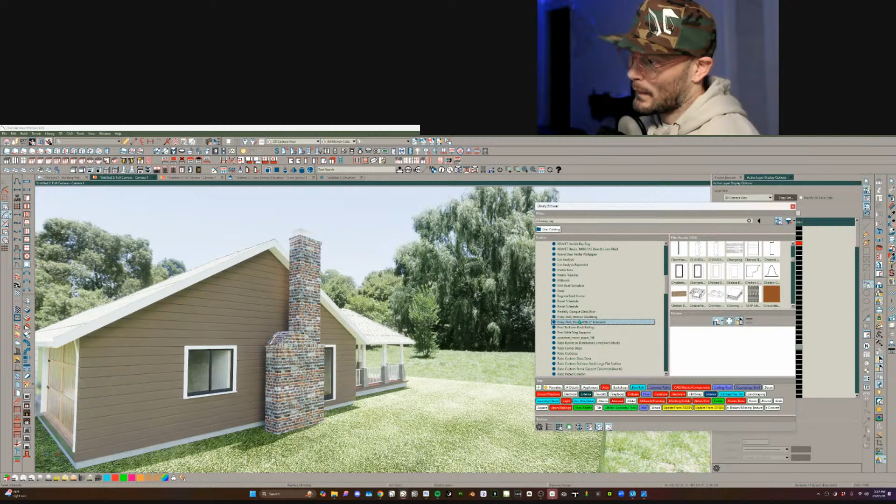Supposed to be in deck railing. That's just a great tool to have. This is built out of a railing that is built to auto generate a deck. So then it's supposed to be. That just makes life easy. You should have that in your toolbars. Oh, I don't have a deck category. I'll be danged. Do I? Huh. Okay.

How do we do this? We do period deck patio. And if I change this color, I want to save this color. Okay. And change color. Bang. There we go. Cool. New stuff. New tag. Who dis? I'm in a folder railings. Crab's railing package. Cool. Railing panels only. Railing components. Railings deck. And that's in Rabs railing. Perfect. Perfect. Perfect.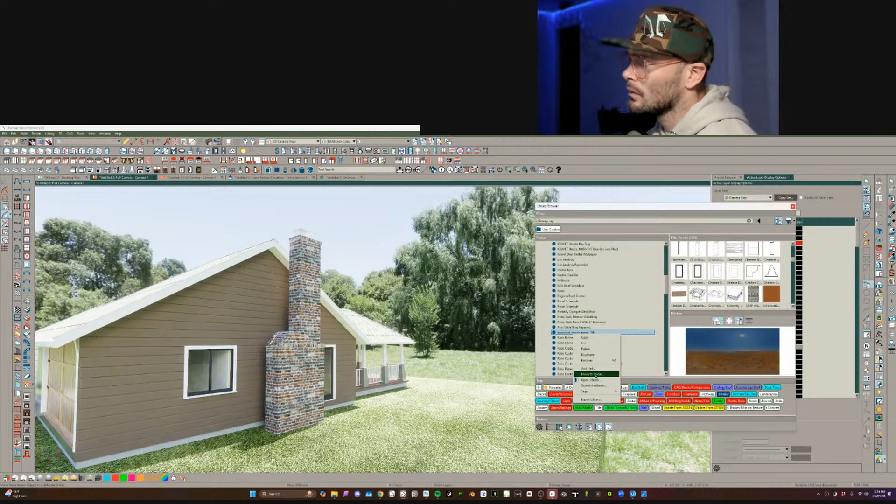Guys are awfully quiet. What are you doing? What are you doing? This is a backdrop. This is a desert backdrop. I like it. I should call it that. What are you doing? Creeping. We're creeping. That's funny. I like that.

Den and burrow. I wonder why I saved this garage door PO2. It's probably one of those things where I saved it just to find out what it was so I could find it in the library. You ever do that? Where you're taking someone else's garage door and saying, all right, what is this? So I can work with it. I think that's what I was doing.

Could turn this into like one glass upper piece so that you could build 4-panel with a glass upper. Yeah. Delete it. I need to do more custom garage doors because I've got that builder tool. I don't use it. No one asked me for garage door stuff.

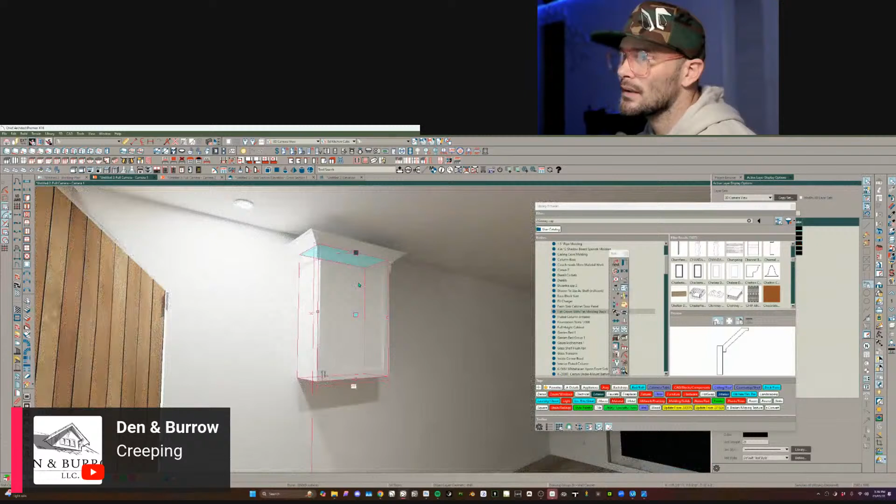Oh, this one's fun. Flat crown with flat molding stack. So if we come in here, this is a funny little house, and throw this in. The point of this flat crown molding deal is you take this up till it bumps, gotta have bumps on. Take this up till it bumps, hit tab or enter, copy the dimension that's there, and then come in the moldings and just change the height and change the offset.

And anyways, this molding is a symbol. It's not a molding. Or it is a molding, but it's a 3D molding. So it is a symbol that has a stretch plane on the flat stock. So it automatically stretches the flat when you change the height of it, so that the crown profile always stays the same. And so it's just an easy way to get a crown profile that butts the ceiling. I have to build a bunch more of those, different styles and stuff.

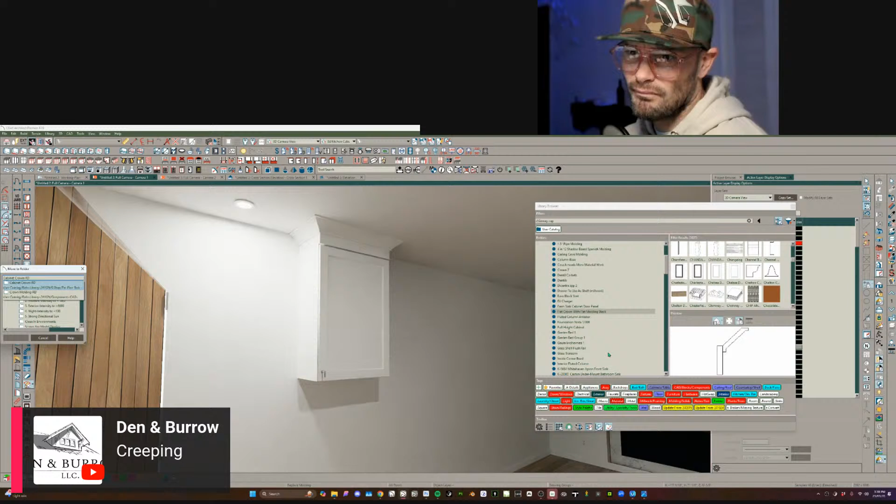Molding, ceiling, interior. Yep. Crown. Cabinet crown. Yep. Sure.

All right. I'm starting to hear buzzing in my email, which usually means I forgot something. That's never good. Yeah, all right. I think I gotta close this down in maybe 15 minutes or so. Okay, what else we got?

This one's my new favorite. Easily for exteriors. Just a huge architectural block of distribution splines, so that you can just take a spline, continue it, continue it, continue it, right in front of the garage door. You could trade it out for other stuff.

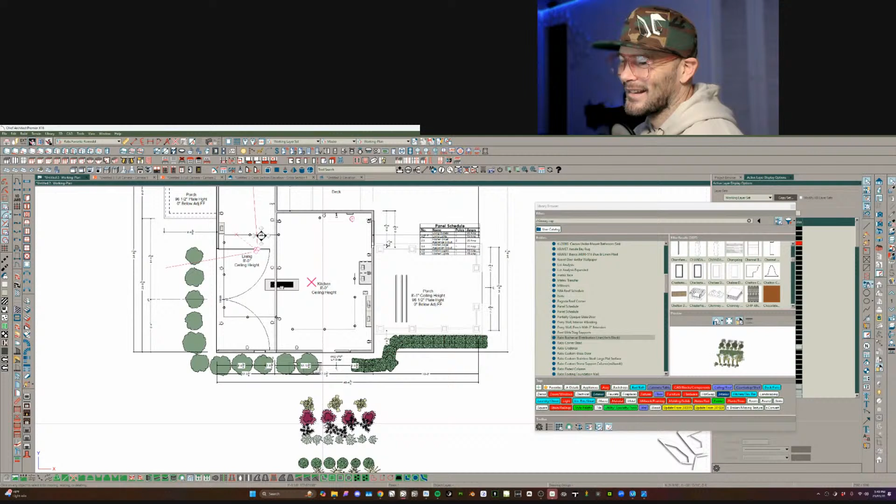Oh, look at this. This one's gonna turn. Square, make a little break, maybe get rid of that hard turn and turn again. And a little break. Yeah, something like that. That'll be funny. And yeah, stuff like this, just auto-generated landscaping stuff, just so fast. You gotta love it. You can even put this block within this block and just have it go crazy. Let's see that. Actually, that didn't turn out bad. It's believable. I'm gonna turn this house into a piece of art.

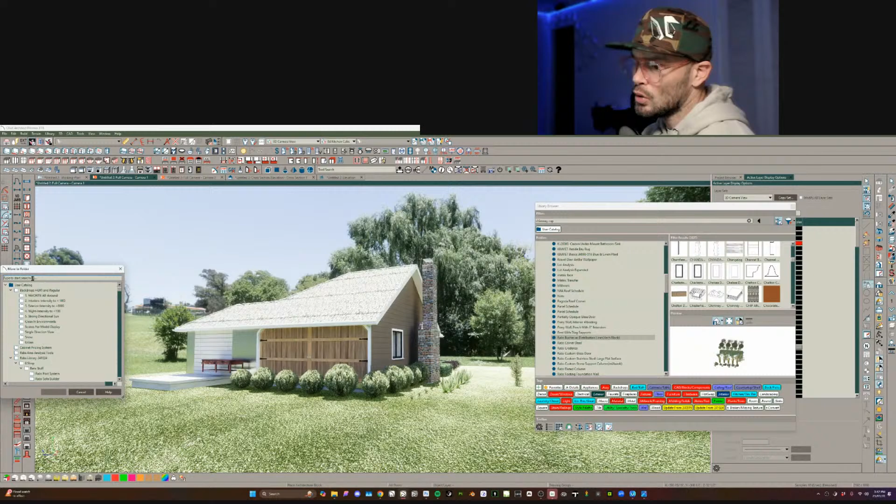Oh, I forgot to put RD fireplace on those last things in the fireplace. Dang it. Have to fix that. Okay. Bush. I think Porch searches will still get it if landscaping, even though it's RD landscaping. Yeah. I'm gonna make a toolbar item for this because it's too good. Let's look up Azzy. Oh, I need to change its name to Azzy too.

Very curious if my NFA roof schedule thing actually works and how the heck it works. No idea. It's another one of those things I just built, and does it actually work? Yeah, no idea. And what's with this note? It's just a bat fill note. Interesting. It's been a training session thing.

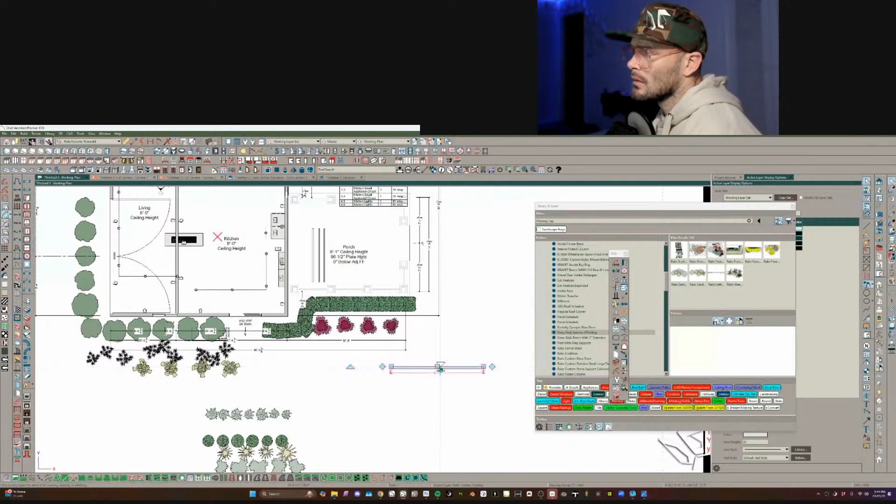Pony wall interior 4 existing. Why is that in here? And it's see-through. Room divider. Room divider with a pony wall. Pony wall room divider with interior 4 existing on top. What's the thought there? The heck was I doing? That's a weird one. Elevation lower wall top is super tall. Let's try this. Oh, okay, let's fix it. I know what this is doing.

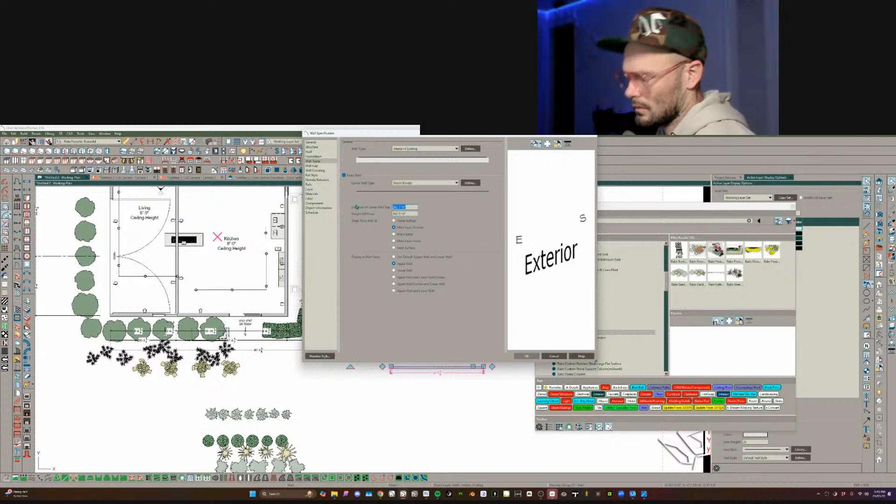Let's say 60-inch. No, what's 96 minus 24? Someone help me. 72? Is that what it is? So let's go 72. And so we're drawing this, drawing this, drawing this, drawing this, and then I have a column builder that's got no room definition. And then I throw in a doorway that's got no jamb.

By the way, we should have an arch tool. Why do I not have an arch tool? All right, so that's the next part of this. Let's make it an arch. Round top arch. Let's see how this is looking. Do this. Okay. Lower portion's room divider, which you're not going to define the room on because it will do this. Well, let's see if I change it. Porch it. That change? Yes, that changes. And so that's the railing, right?

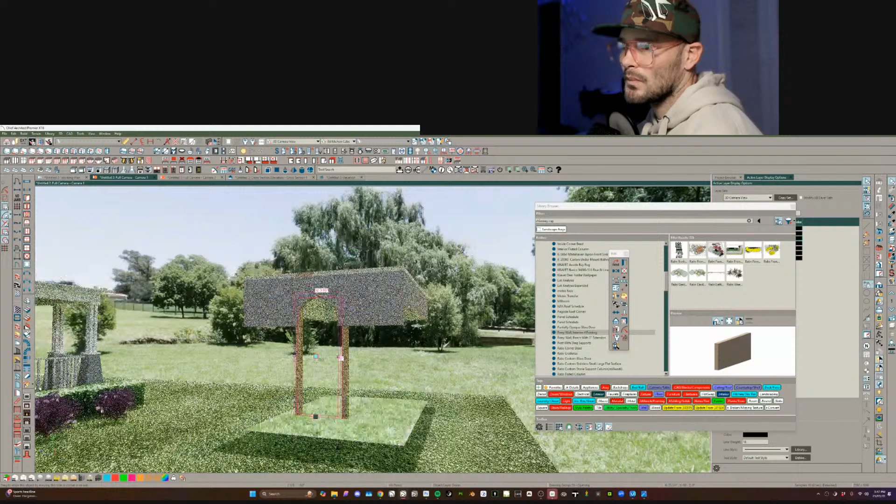So this is the case where if you have some columns and you need the arch to sit on the columns like so, because I know you need to do that all the time, right? That's something that's really common for you in your business. But I had a design that needed exactly this. There you go, just like that.

And so I just tab and, well, actually, we would expand this full height, both sides. And yeah, and then throw a little add in here, pop this in here like that, and pop this one in here. Oh, can we pin this? Yeah, we can. Yeah, look how slick this is. Like magic. Isn't that cool? Super fast. Neat.

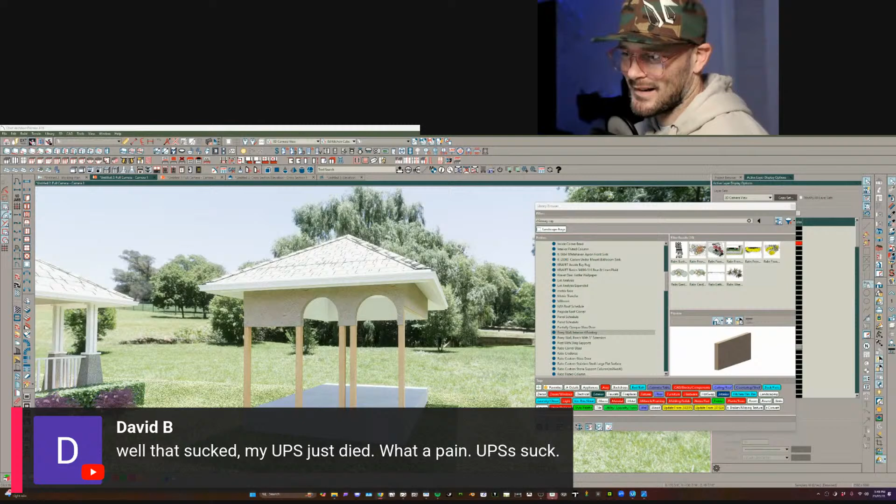What's happening here? Let's see. Pino, what's this question mark? Tell me what that is. And then I'm jumping off of this.

I need some food. And I just remembered. My stomach just remembered that I haven't eaten all day. Not good.

Not good. But yeah, we need an arch builder tool. Let's make one. Arch. Create arch. Arch painter. Arch painter. Wait, I think I do have one. Did I already have one? I'm going to be an idiot if I already had one. I just made this one. Type. Arched cabinet. Did I not have an arch painter? No, I didn't. Good. I'm making new stuff.

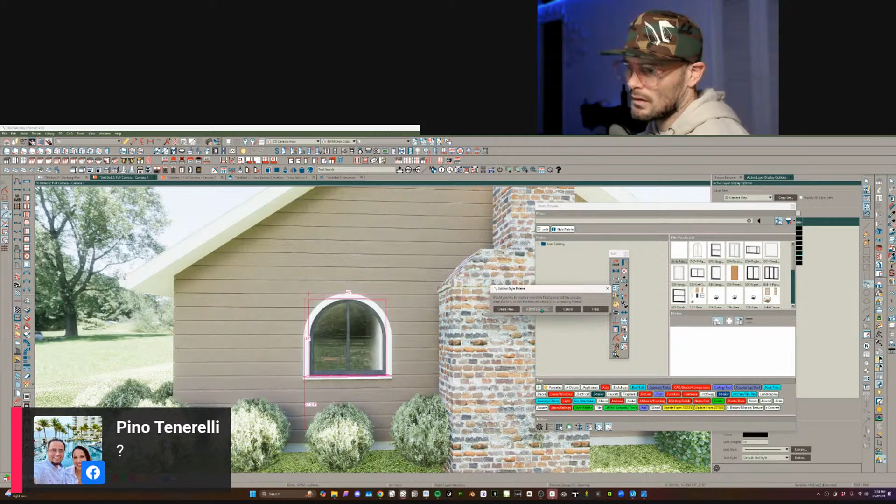Cool. So now we need a window arch. And we should do a dog ear arch and blah, blah, blah. And then stick it in our tools, because we're smart, responsible designers. And add to existing arch. Arch painter. Bam. And then clear all. Arch. Select found. Boom, boom, boom. And now you guys want to see this all get tricked out. Let's do a little shutdown.

What would be a symbol for creating an arch? Should take an existing window symbol. Oh, whatever. Okay. Resources, graphics buttons, and window, consumer. That's not a very pretty window to make an arch from, but you can make it from this. Do I like that? It's kind of an ugly graphic. Can we do a better graphic? Not really. I guess we'll use the window because door's not any better. All right.

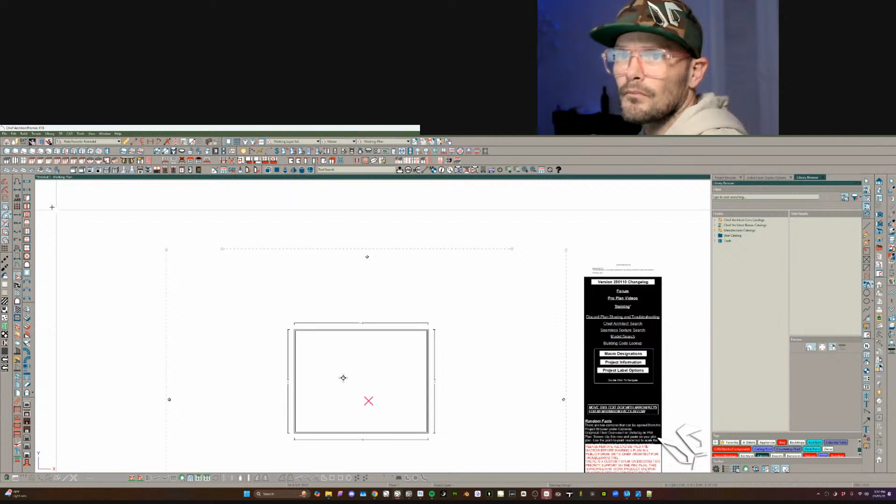Arch Painter. Voila. It's freaking awesome. Stacks. Yep. Cool. Super cool. Super fast. So you should be able to just throw a doorway in, no jamb, and go arch it. Yeah. Nice. That's cool.